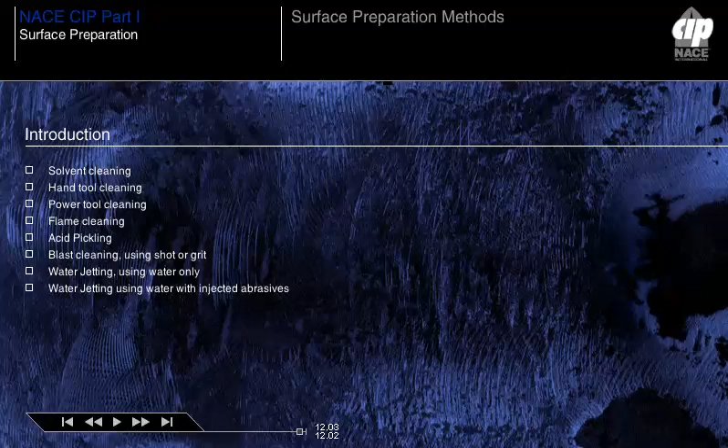New unpainted steel is relatively easy to clean. Provided that the surface has not been exposed to corrosion in a chemical or marine environment, the biggest problem is likely to be removal of mill-scale deposits. Blast cleaning using either shot or grit can easily remove most mill-scale.

An advantage of using grit for blasting is the simultaneous creation of an angular surface profile that is suitable for good adhesion of coatings. Tightly adhered mill-scale can be difficult to remove without blast cleaning.

New unpainted metals such as aluminium or zinc can be prepared by light blast cleaning to both clean and roughen the surface. Adequate adhesion of coatings to the prepared surface may be difficult to achieve any other way.

Chemical or solvent cleaning may be possible, but special paint primers, such as acid etch primers, must then be used to achieve good performance. Mill-scale is formed by reaction between the hot steel and oxygen in the environment during the production process. As a result, the surface of newly produced hot-rolled steel is generally covered with blue-black deposits of mill-scale.

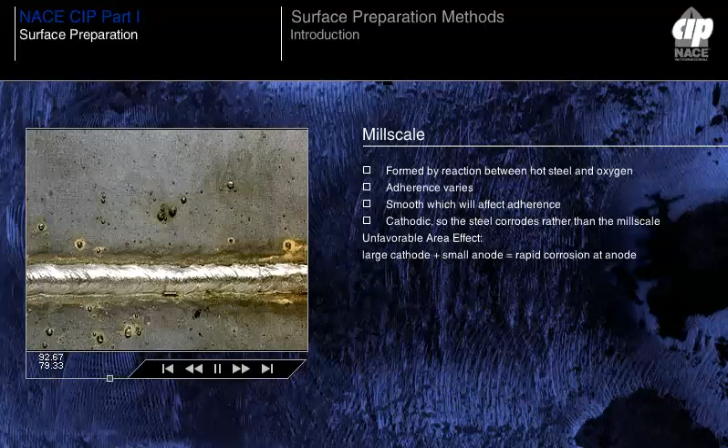When most of the surface is covered by mill-scale, corrosion at the anodic areas may be accelerated by the unfavorable area effect shown in the formula. For best results, new steel should be cleaned by abrasive blasting to remove mill-scale and to provide an anchor pattern for optimum coating adhesion.

Surfaces that have been exposed to the environment and have subsequently corroded may be more difficult to clean. The surface is often rough and may have deep pits and other irregularities. When chemical contaminants have become bonded to the surface through a chemical corrosion reaction, removal may require special treatment.

The processes used for cleaning corroded steel are generally the same as those used for cleaning new steel, and include hand and power tools, blast cleaning, and perhaps water jetting. Zinc exposed to the atmosphere develops a passive film of zinc oxide and/or zinc carbonate. Provided they are tightly adherent, these layers can aid the adhesion of paints due to their relative roughness.

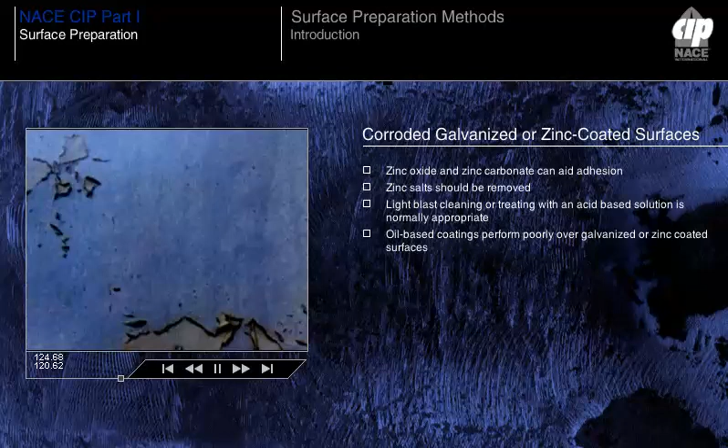This reaction, the formation of soap, causes degradation of the oil-based binder and consequent loss of adhesion of the coating to the zinc surface. Aluminium oxidizes in the atmosphere much like zinc and zinc-coated surfaces to form a passive film of aluminium oxide.

The surface should be lightly blasted or wire brushed to remove powdery or loosely adherent salts before treatment with an aluminium treatment, for example, etch primer before coating. A primer with known compatibility and strong adherence to the clean surface should be selected.

Other surfaces that are commonly painted include plastics, wood and concrete. All of these require special surface preparation and coating suited to their special characteristics. A discussion of surface preparation for these surfaces can be found in the Advanced Surface Preparation module.

The choice of surface preparation method is often determined by the choice of coating system. Coatings should be matched to the degree of surface preparation desired or possible. If coatings are to be successful with very little surface preparation, they must be chosen for their surface-tolerant characteristics.

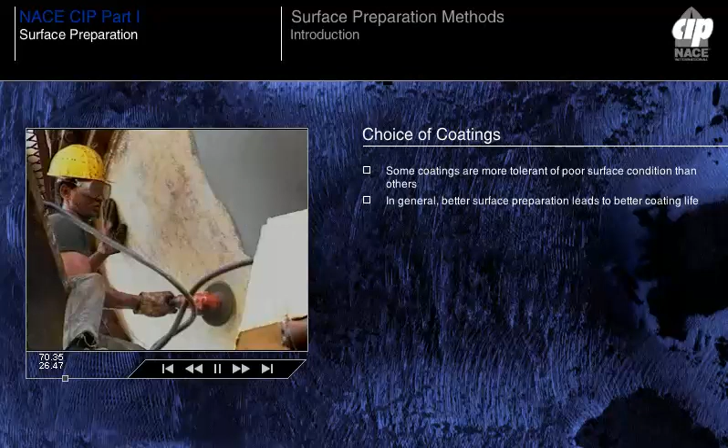Most coatings need better standards of surface preparation. Modern high-performance coatings are likely to require blast cleaning to a high degree of cleanliness, and in some cases may also require that the surface is free of chemical contamination.

The degree of cleaning required is closely related to the type of coatings to be used, although in general a better standard of cleaning will provide better long-term protection from any coating system.

Solvent cleaning is a method for removing all visible oil, grease, soil, drawing and cutting compounds, and other soluble contaminants from steel surfaces. It is intended that solvent cleaning be used prior to the application of paint and in conjunction with surface preparation methods specified for the removal of rust, mill scale or paint.

The standard SSPC SP1 is the only commonly used standard that formally governs solvent cleaning to remove oil, grease, dirt, soil, drawing compounds and other similar organic compounds. SSPC SP1 defines a variety of pre-cleaning methods, including those listed here.

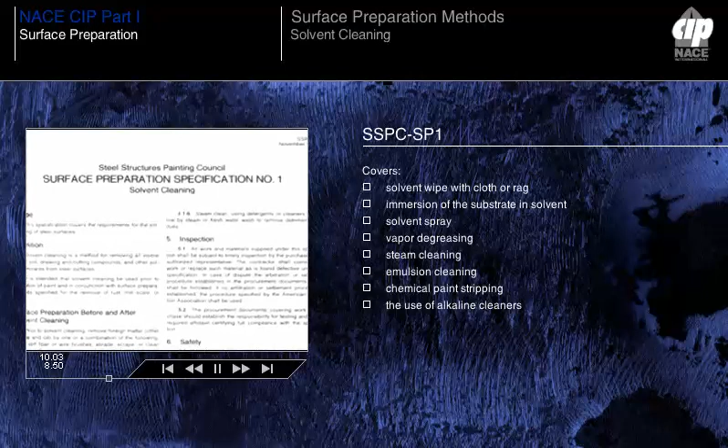Organic solvents such as kerosene, turpentine, naphtha, mineral spirits, toluol, xylol, etc. clean the metal by dissolving and diluting the oil and grease contamination on the surface. Some organic solvents used for solvent cleaning may be considered hazardous to health and are generally likely to be a fire risk. In particular, toluol is subject to health and safety restrictions in many countries.

Inorganic materials such as chlorides, sulfates, weld flux and mill scale are not removed by organic solvents. The last wash or rinse should be made using clean solvent to remove the slight film of oil or grease that may be left on the surface. This film, if left in place, may interfere with the adhesion of the coating to the surface.

Some solvents, for example xylol and toluol, will also dissolve some paint films so they can be removed from the surface. Non-convertible coatings, for example chlorinated rubber or vinyl, are most likely to be softened or removed by solvent washing.

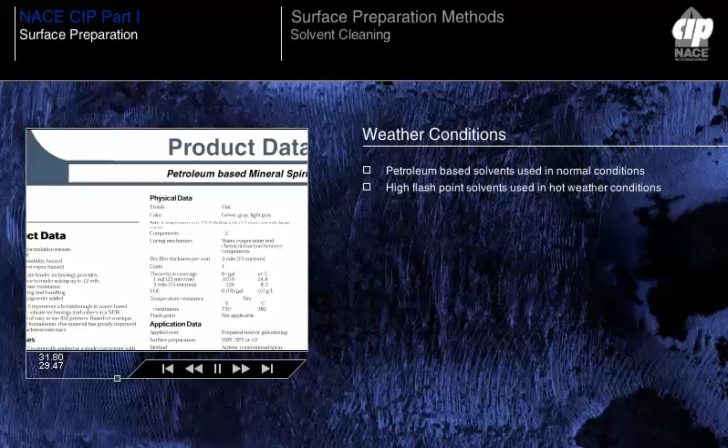All solvents are potentially hazardous and should be used when their concentrations in air being breathed by workers are low enough for safety, in accordance with current federal, state and local regulations for threshold limit values, TLV. Appropriate fresh air masks should be used in confined spaces and when the safe concentration may be exceeded. The fresh air supply should be free of carbon monoxide, CO, or other contaminants from other sources such as engine exhausts, etc.

The concentration of solvents in air should not exceed the lower limit of flammability, known as the lower explosive limit, LEL, or a fire or explosion could occur. Such concentrations are most likely to occur in confined spaces, such as tanks, pipes or vessels. In general, cost considerations and regulations restricting the use of organic solvents have become so stringent as to discourage the use of these materials except in highly controlled special situations.

Alkaline cleaners such as trisodium phosphate, TSP, and sodium hydroxide saponify certain oils and greases, and their surface active components wash away other contaminants such as oils. These cleaners may also saponify certain coating vehicles, and the soaps formed can be washed away easily with water.

Often, alkaline cleaners are combined with surfactants, wetting agents, inhibitors and detergents to form proprietary products and should be used according to the manufacturer's recommendations. These products are often used at elevated temperatures. In the cleaning process, a slightly soapy film may be left on the surface. This film must be washed off, usually with a high-pressure, hot water rinse. Residues that remain on the surface will affect the adhesion of the coating to the metal.

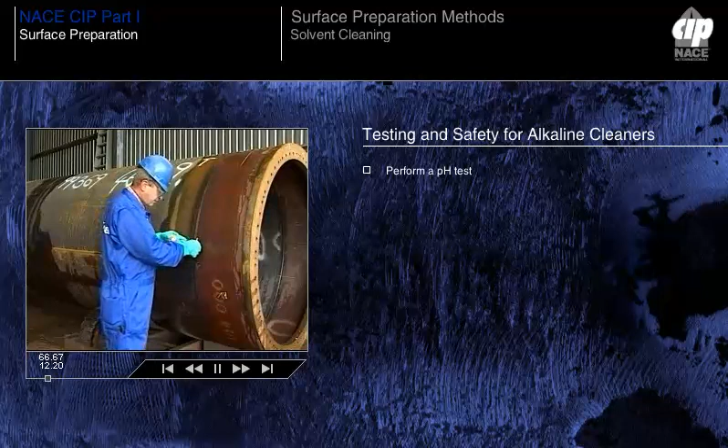A pH paper test could be made to determine the effectiveness of the wash. In general, the pH of the washed surface should not exceed the pH of the wash water. In some cases, the owner may elect to use an acidic wash, such as 0.1% by weight chromic acid, sodium dichromate, or potassium dichromate, to neutralize traces of the alkali on the surface.

Safety precautions should be followed in using the alkaline cleaners and chromic acid. The alkaline materials may cause burns, and the chromic acid and chromates may cause dermatitis. Workers should wear rubber gloves and safety goggles or eyeglasses, and where these materials may be applied by spraying, respirators should be used.

Acidic cleaners are usually composed of fairly strong acids, such as phosphoric acid, H3PO4, with small quantities of surfactants, water-miscible solvents, and organic wetting and emulsifying agents. Acidic cleaners remove soil by chemical attack and by dissolving the reaction products. They may be used to remove corrosion products and for other special purposes.

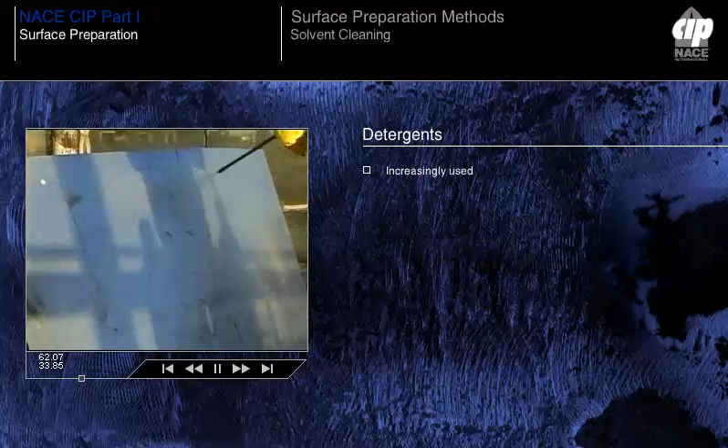Generally, these cleaners are composed of buffering salts, dispersants, soaps and inhibitors, and they function by wetting, emulsifying, dispersing and solubilizing the contaminants, which can be washed away using water, usually hot, or steam. They are frequently used at temperatures ranging from 150 degrees Fahrenheit to 212 degrees Fahrenheit, 65 degrees centigrade to 100 degrees centigrade.

Emulsion cleaners typically are proprietary products and should be used in accordance with the manufacturer's instructions. These cleaners may contain oil-soluble soaps or emulsifying agents, buffering salts, dispersants and inhibitors, along with kerosene or some type of mineral spirits. Emulsion cleaners are generally sprayed onto the surface to be cleaned, and they function by wetting, emulsifying, dispersing and solubilizing the contaminants.

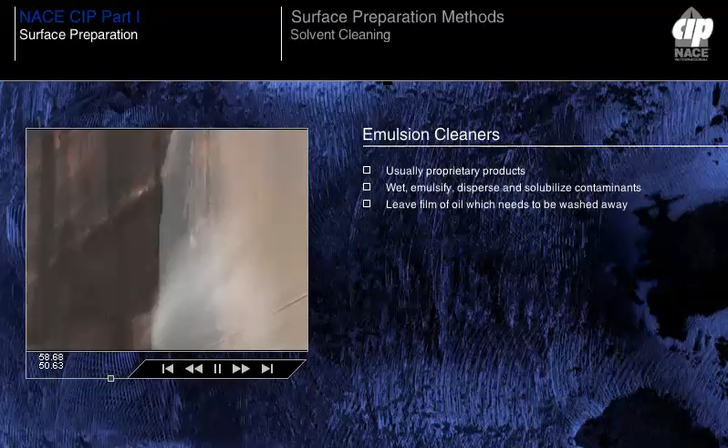Generally, the emulsion cleaners on the surface leave a thin film of oil which must be washed away with hot water, steam, solvents, detergents or some type of alkaline cleaning agents. Water is a common, if not powerful, solvent and may be used to good effect in cleaning a surface. We'll discuss its use later when we discuss water blast cleaning and water jetting.

In the use of any cleaning method, appropriate safety precautions must be taken. Also, it's important to thoroughly rinse surfaces, particularly when alkaline or acidic materials are used, to minimize the amount of soil remaining and to remove residues of cleaning materials that could adversely affect subsequent coating performance.

Hand tool cleaning is a method to prepare steel surfaces by the use of non-powered hand tools. Hand tool cleaning removes all loose mill scale, rust, paint, and other detrimental foreign matter. It's not generally intended that adherent mill scale, rust, and paint be removed by this process. Mill scale, rust, and paint are considered adherent if they cannot be removed by lifting with a dull putty knife.

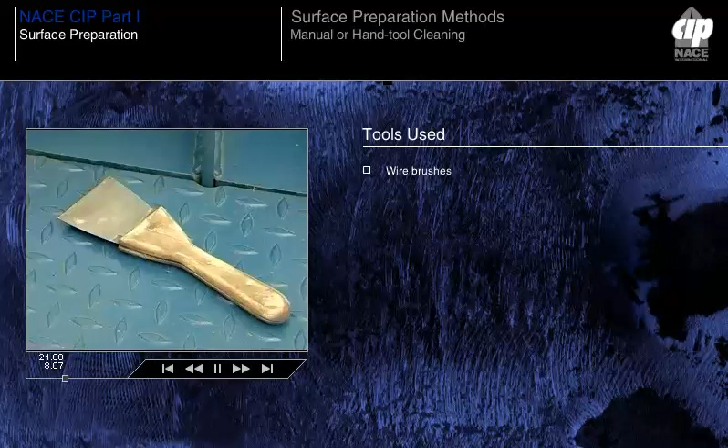Both standards define the use of a dull putty knife to determine whether contaminants are firmly adherent or not. Note, some inspectors have been known to use a sharpened putty knife, which violates the standard. Tools used in hand cleaning include wire brushes, scrapers, chisels, knives, and chipping hammers.

When hand tool cleaning operations commence, certain procedures are followed. The surface is inspected to determine its condition and the presence of heavy layers of rust, and to detect any foreign substances such as oil, grease, or dirt. Solvent emulsion cleaning may be specified or required to remove oil, grease, or dirt. Heavy layers of rust should be removed by chipping.

The surface is cleaned with any of the hand tools previously mentioned and then inspected prior to coating. The coating should be applied within the time period required by the specification. Manual cleaning is the slowest and perhaps the least satisfactory method of surface preparation. Normal tools used are wire brushes or scrapers or chipping hammers. The process is slow, labor-intensive and costly, with the end result still far from satisfactory. It is practically impossible to remove all rust and mill scale by this method.

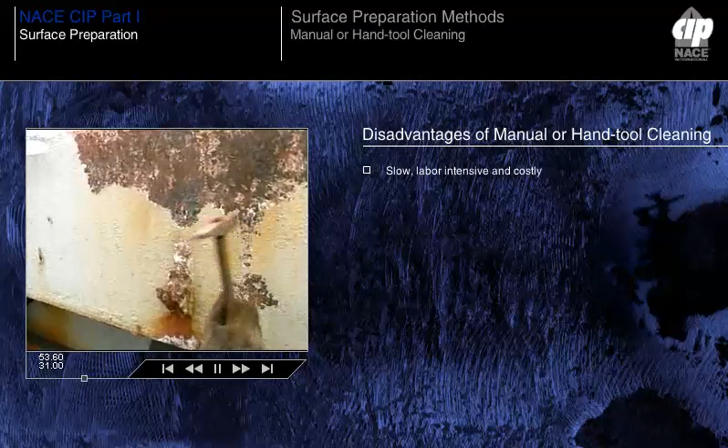A complicating factor can be the reluctance of labor to engage in arduous manual tasks. Slow progress and deteriorating labor relations can lead to significant increases in the cost of achieving a clean surface by these methods. Hand tools have the advantage of being portable and not requiring support power supplies. They're most suitable for use when small areas of work are to be prepared in the vicinity of other workers, or when access is difficult, such as when maintenance is performed on communication towers, 100 meters in the air.

Manual cleaning should only be used when weather or some other factor precludes the use of another, more efficient process. Hand cleaning is one of the oldest methods of surface preparation. Generally, it's used only when power-operated equipment is unavailable, where the work is inaccessible to power tools, or where the job is too small to warrant use of power tools.

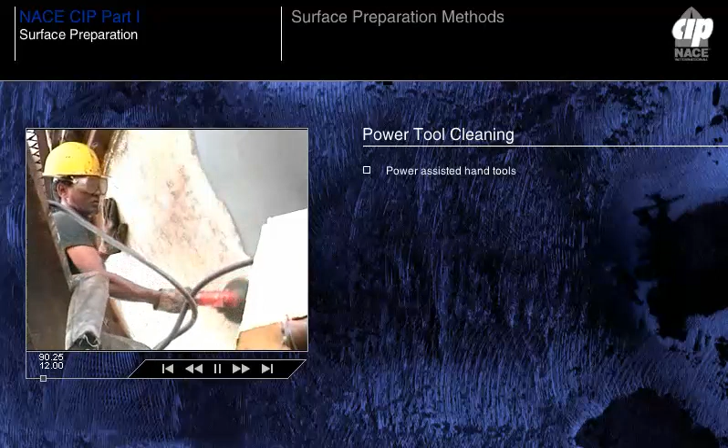Power tool cleaning is a method of preparing steel surfaces by the use of power-assisted mechanical cleaning tools. These tools are essentially similar to the tools used for hand tool cleaning, but a power source such as electricity or compressed air is used.

This process can remove all loose mill scale, loose rust, loose paint, and other detrimental foreign matter, but is not intended to remove adherent mill scale, rust and paint. As in SSPC SP2, mill scale, rust and paint are considered adherent if they cannot be removed by lifting with a dull putty knife. The standards most commonly used to govern the power tool cleaning process are SSPC SP3 or ISO 8501-1 ST3.

Power tool cleaning is frequently used in maintenance operations. In addition to removing loose mill scale, rust and paint, this method is used to remove weld flux, weld spatter and laminations, and to smooth rough welds, and round out gouges before abrasive blast cleaning.

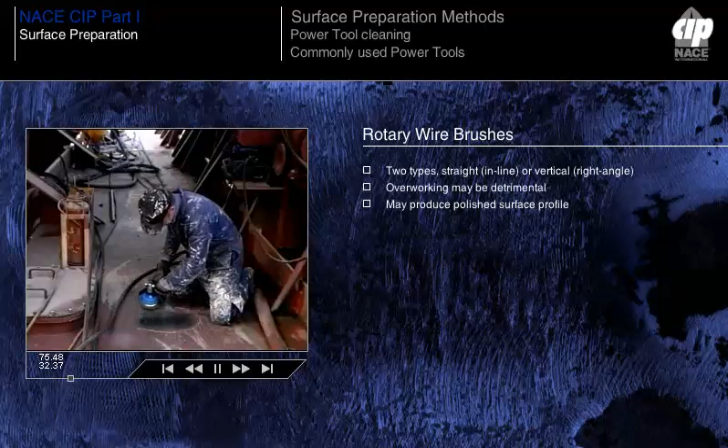The machine design is of two general types: straight or inline, or vertical or right angle. Shown here is a right angle wire brush. Overworking the surface with a wire brush may be detrimental because excessive burnishing develops a polished surface which provides a poor anchor for most coatings. Rotary power wire brushes can also easily spread oil and grease over the surface. Therefore, solvent cleaning is an essential step before power wire brushing.

Problems with polishing the surface rather than providing a roughened surface are particularly likely with this technique, and mean that the use of rotary wire brushes is considered to be less desirable than other forms of power tool cleaning.

A chipping or scaling hammer is the most widely used type of impact tool. A chisel is inserted into the power tool, and the impact from an air-operated or electrically operated piston is transmitted to the chisel, and in turn to the surface to be cleaned. Chisels may be of different shapes and materials. They should be kept sharp, otherwise they may drive rust and scale into the surface. Scrapers and special chisels can be suitably mounted into pneumatically or electrically powered impact tools.

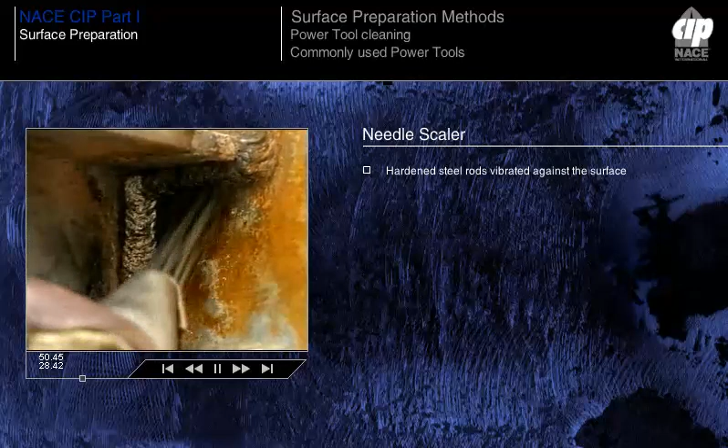A needle gun or needle scaler consists of a number of hardened steel rods which are vibrated against the surface. It is slow in operation and suffers from the same problem as other power tools, since it has a burnishing effect when producing a relatively clean surface. It does, however, produce a surface profile. The needle scaler is effective on welds, corners and irregular surfaces. Certain types of needle scalers fitted with vacuum devices are being used to remove lead-based paint to comply with federal regulations regarding lead abatement.

Piston scalers operate similar to scaling hammers, but the piston also acts as an impact tool. A hammer piston, which takes the place of the chisel, is a circular shaft with the cutting end cross-shaped, somewhat like a star chisel. These scalers are available with 1, 2 or 3 pistons operated in one tool. Also, large assemblies with as many as 15 pistons are available for use on flat, horizontal surfaces such as steel decks. A wide variety of chisels are available for different types of work.

These tools can be used advantageously on large areas to remove rust and scale. Care must be exercised to prevent the cutters of these large rotary scalers from cutting the metal to such an extent that metallic points extend far above the surface, causing early paint failure due to insufficient paint coverage. If these tools are used to remove mill scale and rust from the surface, it's very likely that the surface will be very rough, and care must be taken to ensure that all peaks of the anchor pattern are covered by the coating applied.

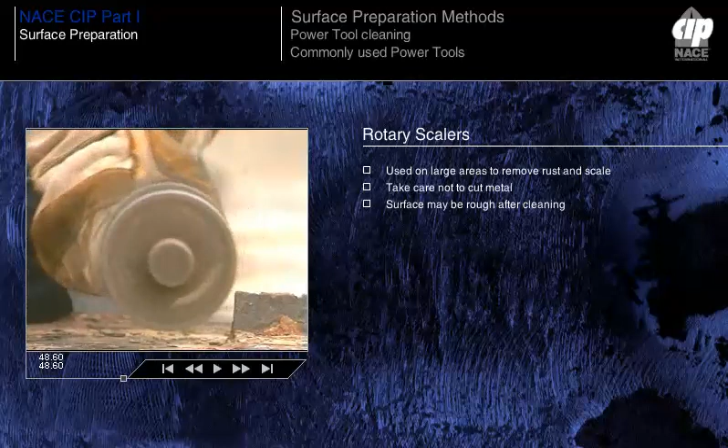Grinders and sanders are often employed to prepare surfaces for painting. Machines used for this purpose may be the same as those used for power wire brushing, with suitable sanding discs or grinding wheels substituted for the wire brushes. The abrasive grit size used with this type of cleaning equipment must be selected properly. Too coarse an abrasive will create a deep anchor that may be unsuitable for good paint performance. An abrasive that is too fine may cause early clogging of the grinding wheel or sanding disc, thus making the process inefficient.

Grinding is well suited for removing weld spatter, for smoothing weld seams, or for rounding off sharp edges or corners. Grinders are frequently used in repairing minor fabrication defects. The anchor profile produced can be extremely good, with complete removal of rust and mill scale. However, such methods of cleaning are very expensive for large areas.

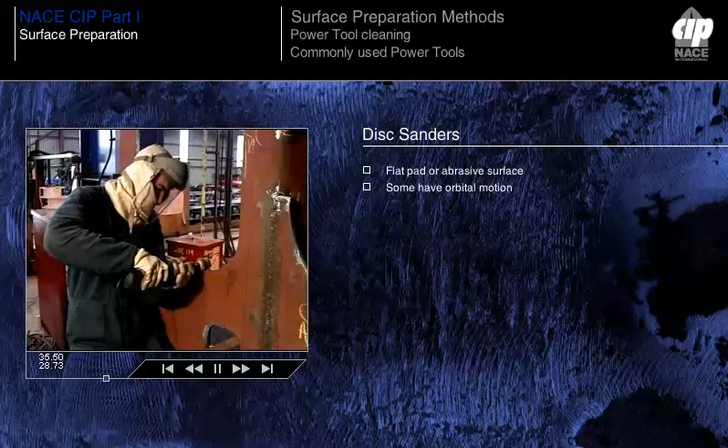Also available are pneumatic and electrically operated sanders that have a flat pad or abrasive surface in contact with the metal to be cleaned. Some of these motor-driven sanders have an orbital motion. Flexible shafts are used on a small scale to operate rotary wire brushes and grinding wheels. On other grinding equipment, the discs or wheels are mounted directly to the main shaft of the motor of other portable or stationary units.

In 1987, SSPC adopted a new standard, SP11, titled Power Tool Cleaning to Bare Metal. When the highest levels of surface preparation are required or specified, for example, SSPC SP11, production of a surface profile is a mandatory part of the surface preparation operation. A surface profile can also be achieved using special power tools designed for the purpose.

SSPC SP11 calls for power tool cleaning to produce a bare metal surface and to retain or produce a profile, where a clean, roughened bare metal surface is desired, but where abrasive blast cleaning is not feasible or is not allowed.

Metallic surfaces prepared according to SSPC SP11, when viewed without magnification, shall be free of all visible oil, grease, dirt, dust, mill scale, rust, paint, oxide, corrosion products, and other foreign matter. Slight residues of rust and paint may be left in the lower portion of pits if the original surface is pitted. If painting is specified, the surface must be roughened to a degree suitable for the paint system, with a profile not less than 1 mil, 25 microns.

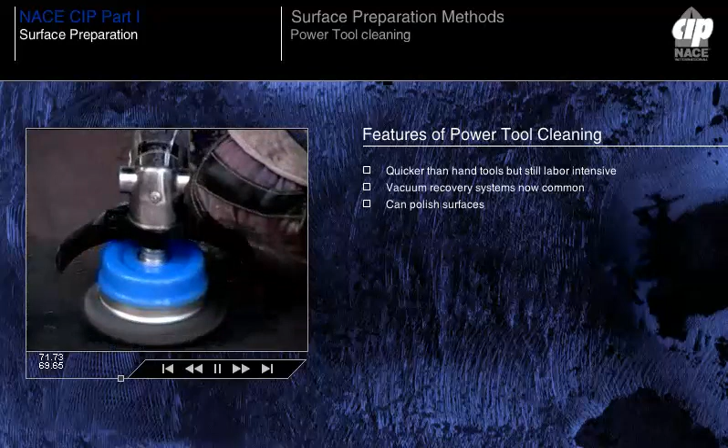The most generally established method of surface preparation for the application of coatings is by dry grit blasting, as defined below. Indeed, when modern sophisticated coatings are applied for surface protection, there is no truly satisfactory or economically equivalent alternative process. The fundamental principle of the grit blasting process is the removal of rust, mill scale, or other surface contaminant, and obtaining a suitably roughened surface by projecting a highly concentrated stream of relatively small abrasive particles at high velocity against the surface to be cleaned.

The surface is abraded through the high-velocity impact of abrasive particles. In preparing steel surfaces for painting by blast cleaning, rust, mill scale and old paint are removed along with some of the base metal.

Various degrees or standards of surface cleanliness achieved by abrasive blast have been defined. The abrasive blast cleaning standards for new steel most commonly used in abrasive blast cleaning applications are produced by NACE, SSPC or ISO. In October 1994, NACE and SSPC issued the following joint surface preparation standards for abrasive blast cleaning. NACE No. 1, SSPC SP5, white metal blast cleaning. NACE No. 2, SSPC SP10, near white metal blast cleaning. NACE No. 3, SSPC SP6, commercial blast cleaning. NACE No. 4, SSPC SP7, brush-off blast cleaning.

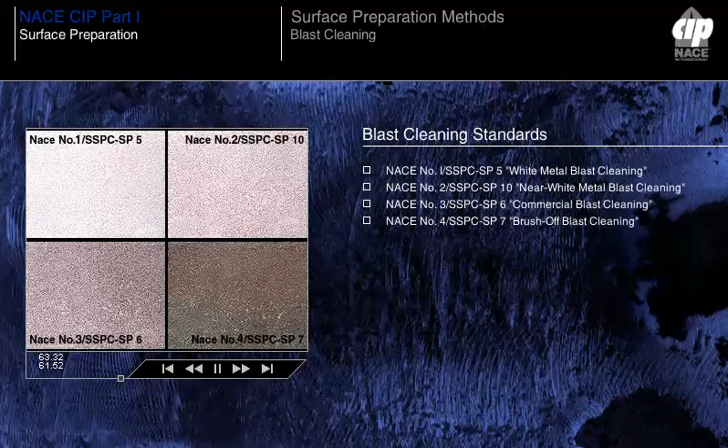These standards are roughly equivalent to the ISO standards that were developed from the original Swedish standards. ISO 8501-1 was published in 1988 and contains 4 standards. Sa 3, blasting to visually clean metal. Sa 2.5, very thorough blast cleaning. Sa 2, thorough blast cleaning. Sa 1, light blast cleaning.

Each system of standards represents a progressive scale of visual appearance only, the best grade being shown first in each case. The quality of blast cleaning is determined visually, and photographic standards are generally used for comparison purposes. There is no correlation between the degree of blast cleaning used and the surface profile produced, and no specific correlation with removal of chemical contamination or non-visible salts. For these issues, other standards and measuring techniques must be used.

Particles of abrasive may be projected by direct feed of the particles from a pressurized container into a high-pressure airstream, pressure blasting, or by centrifugal projection from rapidly rotating impellers, centrifugal blasting or airless blasting.

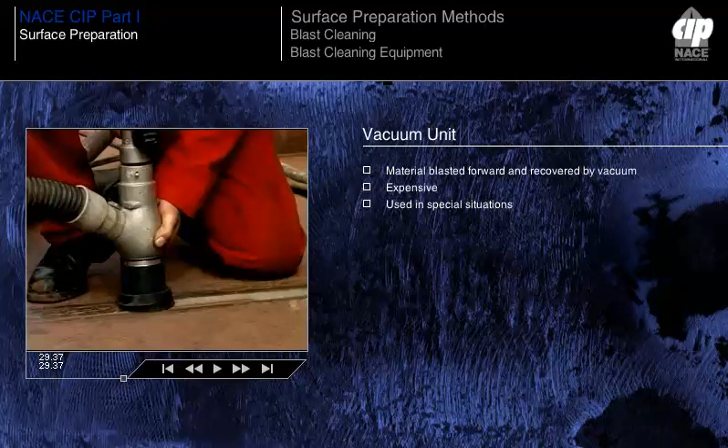Air moves sand from hopper to nozzle. No pressure is applied to the blast hopper. Energy to move the abrasive out of the hopper comes from a reduction of air pressure through a venturi. Because abrasive moves forward at a lower velocity, this method is used for light-duty jobs, such as frosting glass, blasting welds, and blasting car bodies and touch-up work.

Abrasive is blown into a standpipe and out through an elbow into the hose. This method is commonly used with fine abrasives.

A suitable type of blast unit must be chosen for the specific job. The most commonly used manual blast units are pressure vessels and are able to deliver abrasive into a compressed air stream by pressurizing the abrasive container. Other designs, such as gravity-fed pots or suction-fed units, are not commonly used for surface preparation on an industrial scale.

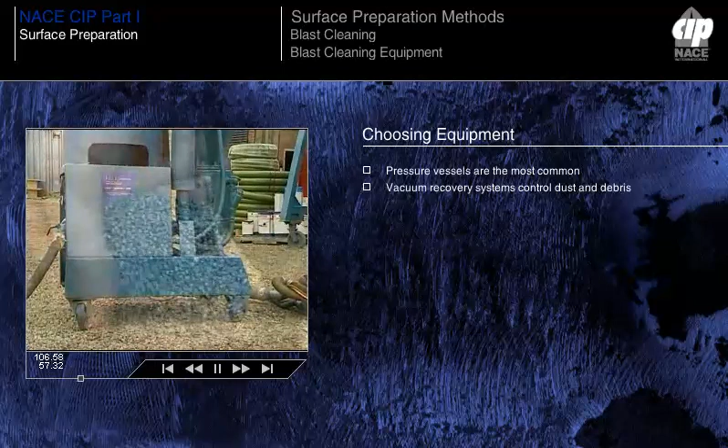When control of dust and debris is important, vacuum recovery systems are fitted to existing equipment, or specially designed units are used. The abrasive and waste are collected together, then generally separated and the abrasive recycled. The abrasive used in this case must be suitable for recycling.

The size of blast unit usually varies with the job. Blast units can range in size from those holding 1.5 bags of abrasive for a small job to those holding over 40 tons of abrasive.

It is important to document the quantity, type and size of equipment on the job. If the specification addresses certain equipment requirements and the equipment does not meet these requirements, the inspector should report the deficiency to the owner's representative.

It is sometimes desirable to blast clean individual items in an enclosed space so that other trades can continue to work in the immediate vicinity. If this is a regular requirement, many factories will buy or build a blast cleaning cabinet. The size of typical cabinets may vary from the very small cupboard, where blasting is done from outside the cabinet, with hands inserted through holes in the side, to the relatively large blasting room.

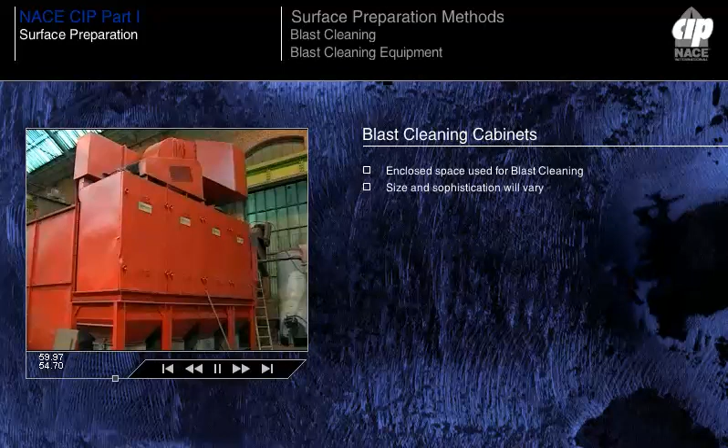The most complex of the blast cleaning cabinets are designed for large quantities of steel to be blast cleaned on a regular basis, such as all plate received by a shipbuilding yard. These machines, often known as wheelabrators, are designed to work on a continuous basis and include a conveying system that will carry items through the cabinet continuously.

It is usual for these cabinets to use a system of rotating wheels with vanes to propel the abrasive, from which the term wheelabrator has been adapted for general use. These cabinets too have an abrasive recovery and recycling system and are capable of very high rates of cleaning.

Blasting with a wheelabrator machine is often highly automated and is best suited to repetitive blasting tasks at a fixed location. Typical locations would include shipyards or steel structure fabrication facilities, such as those used for building oil production platforms and their ancillary equipment.

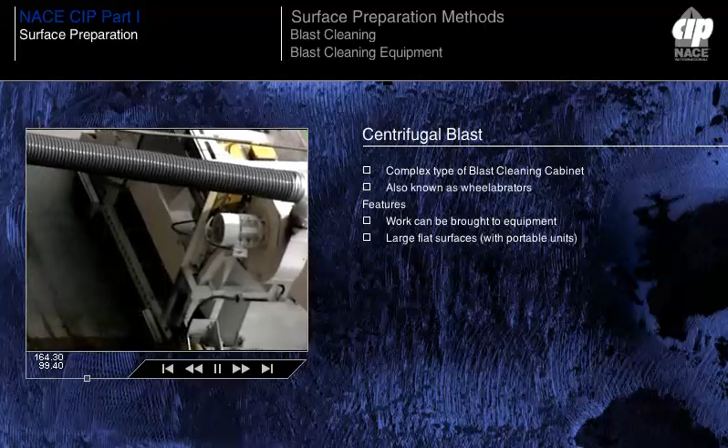This method of cleaning is used in a stationary setup when work can be brought to the equipment, for large flat surfaces when a portable wheel blast unit can be driven across the surface, such as on the flight deck of an aircraft carrier, or on concrete surfaces such as floors, pits, etc. To eliminate the need for compressor setup, including air blast hoses, abrasive pot and an attendant, and for lower production cost.

Centrifugal blasting may be used on such workpieces as pipe, piling, reinforcing steel, beams, flat plate, etc., with a series of centrifugal blast wheels housed in a blast enclosure, arranged so all sides of the work are cleaned as it travels through the equipment. Wheel blast operations are described in more detail in the advanced module of this training program.

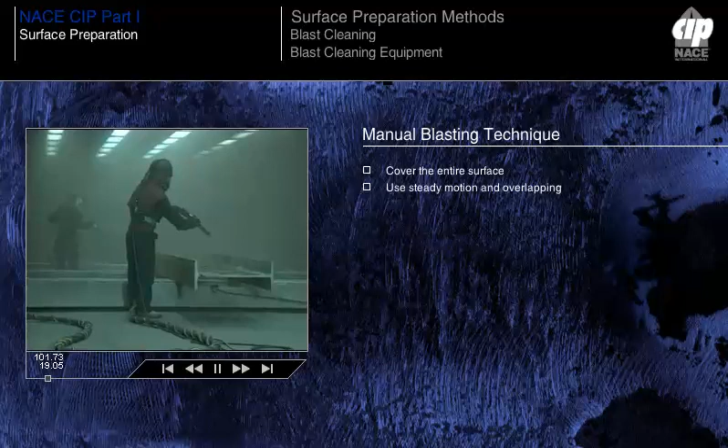Manual blasting should systematically cover the entire surface to be cleaned by moving the nozzle at fairly constant speeds in straight paths, each succeeding pass overlapping the preceding one and exposing clean metal without any discolored patches. The standard of blast cleaning should be no more and certainly no less than is required by the specification.

The nozzle should be held close to right angles to the surface, but at a slight angle so that the abrasive does not bounce right back at the operator. Some surfaces, such as those with heavy mill-scale layers, or with coatings such as thermal sprayed zinc or aluminium, are best blasted initially at a shallower angle, for example 45 degrees.

The operator must be aware that this technique, while efficiently removing the existing coating layer, produces a reduced surface profile due to the angle of impact. Final blasting at right angles to the surface is required if the correct surface profile is to be achieved. Speed of nozzle traverse is dictated by rate of cleaning and should be as fast as will clean thoroughly without unnecessary dwell.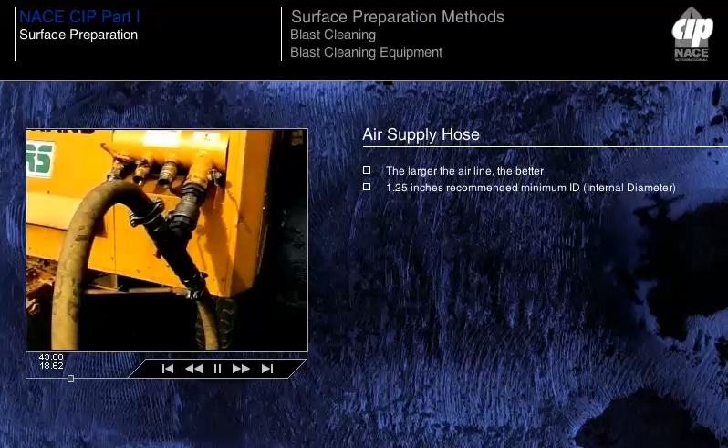The recommended size should be 3 to 4 times the nozzle orifice. On lines longer than 100 feet, 30 meters, the hose internal diameter should be 4 times the blast nozzle orifice size. The large size eliminates loss of air pressure through the air hose because of friction.

There are two types of abrasive supply hose. 4-ply, for use when the hose is subject to external abuse or when there is danger of the operator pulling it at right angles. 2-ply, a lighter hose that is preferred by some blasters because of its greater flexibility.

All hoses should have capped ends to allow for coupling and to prevent any moisture or compressed air from working its way through the braid or ply of the hose. Air inside the hose can cause the hose cover to bubble. Water can cause rotting away of the wrapping on the hose. The size and length of abrasive blast hoses are related to their efficiency.

Hoses generally cannot be too large. 75% of hoses used today have a 1.25 to 1.5 inch inside diameter, 31 millimeters to 38 millimeters. A rule of thumb is that the hose ID should be 3 to 4 times the size of the nozzle orifice.

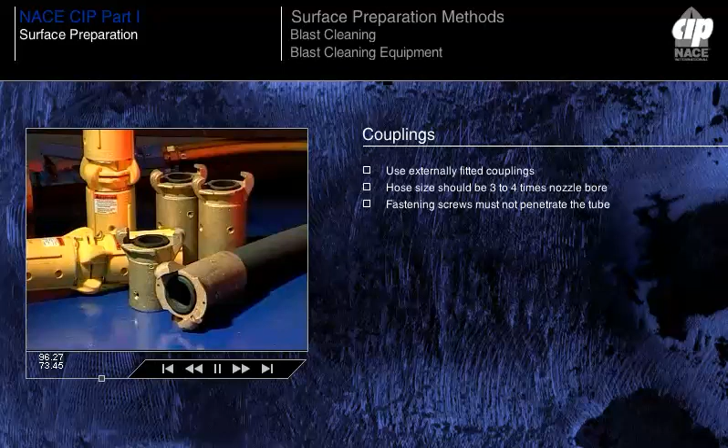Couplings are made of both bronze, which lasts longer, and plastic, which is lighter and easier to handle when the hose must be lifted into the air. Couplings should be wired shut or otherwise properly coupled, both to ensure safe connections and to prevent the coupling from opening if caught on irregular surfaces. Grounding should be maintained through the coupling.

Owing to the inevitable pressure drop within airlines, pressure hoses should be kept as short as possible. When greater distances must be used, the hose should be kept in straight runs, and any bends should be wide and have a smooth radius.

Efficient use of the blast pot can save money in both man-hours and abrasives. The blast pot should be emptied daily if practical and kept dry to avoid contamination of the abrasive. Maintenance should be performed to eliminate leaks and eliminate pressure losses. The vessel should be inspected annually and hydro-tested to 1.5 times the design pressure to ensure effective functioning.

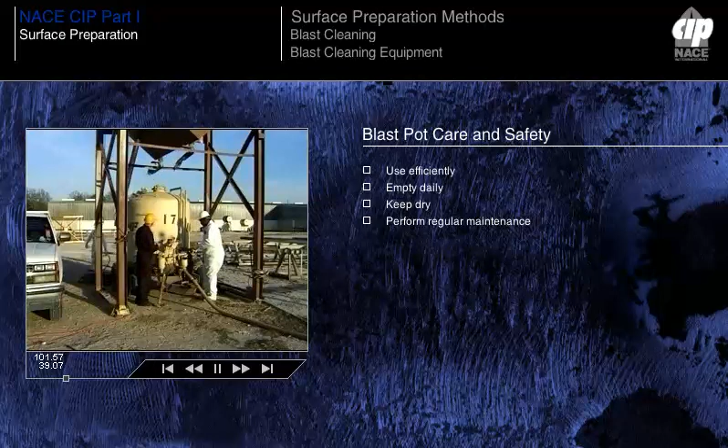Blast cleaning is a potentially hazardous operation. Safety with abrasives under pressure is very important. Remember that abrasives and air leave the nozzle at great speed, at a rate close to 450 miles per hour, 720 kilometers per hour, 660 feet per second, or about half the speed of a shotgun charge, and can impact on surfaces or other workers a considerable distance from the operation.

The entire system, including hoses, operator and workpiece, must be grounded to prevent injury due to electrical shock. Grounding is particularly important when the operator is working at heights, when shock may lead to a fall, or when blasting in a hazardous environment.

In the blast cleaning operation, the air compressor must be capable of delivering sufficient air volume to maintain the required pressure at the nozzle. Related equipment, including the following, must be of sufficient size and type to match the compressor output: air and abrasive hoses, hose couplings, blast nozzles.

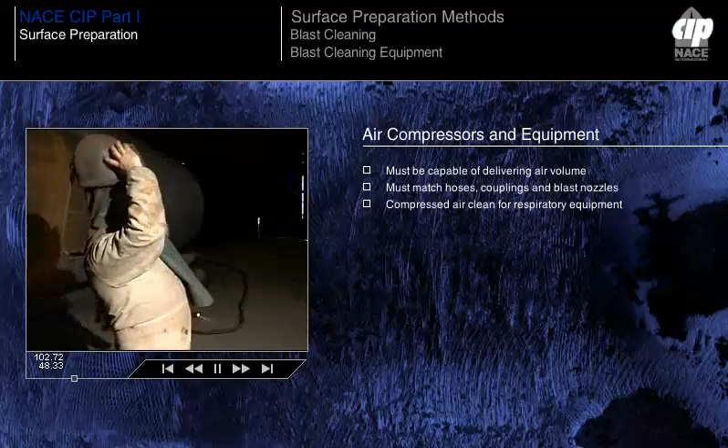The compressed air must be free of contaminants, including oil and water. First, since air-supplied breathing equipment is required when abrasive blast operations are being performed, it is critical that the breathing air be fresh and pure. This is the responsibility of the applicator. Second, it is important that the blast air be clean to ensure that the blast cleaning operation does not add contaminants to the surface being cleaned.

The blasting contractor is responsible for complying with all requirements of the specifications, such as size of hose, type of nozzle and air volume, when these are detailed in the specifications. The coating inspector may check the requirements to ensure compliance by the contractor.

Compressed air is a common source of power for blasting machinery, paint spray equipment, power tools, etc. It is favoured on site because it is relatively safe, being less dangerous than electrical power. In order to produce quantities of compressed air, it is necessary to use a compressor. Normally driven by a diesel motor, though electric compressors are common in fixed workshops, a compressor draws in atmospheric air, pressurizes it, and feeds the air into a pressure vessel known as a receiver. The air is then held in the receiver until demanded by the equipment in use.

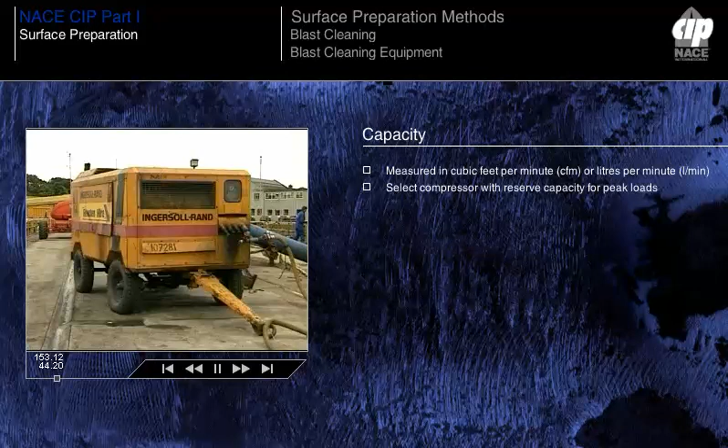For blast cleaning, using a 7/16 inch diameter nozzle operating from one blast pot, it is generally recommended that a compressor with a minimum capacity of 350 cubic feet per minute or 9,900 litres per minute is used. For extended use, a compressor with greater capacity, perhaps 600 cubic feet per minute, 17,000 litres per minute, will operate with less strain and greater efficiency.

The same compressor used for blasting is often used to drive air-operated spray guns and other equipment. No other equipment requires such large quantities of compressed air as the blast cleaning operation.

It is estimated that with one 3/8 inch, 9.5 millimeter nozzle operating, there will be a 5 pound, 35 kPa drop in pressure for each 50 feet, 15 meters of hose in use. This pressure drop will be compounded according to the number of operating nozzles, the nozzle sizes, and the lengths of hose being used.

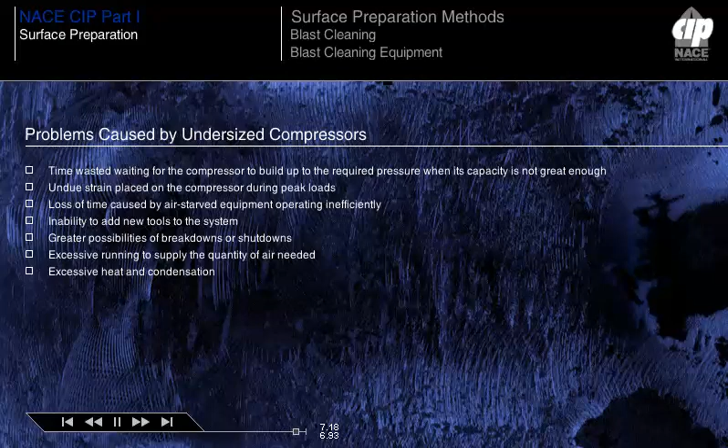A number of accessories are key parts of the compressor equipment. It is essential that surface cleanliness should not be impaired during the blast cleaning process. This can arise from oil vapor or droplets carried over in the air from the compressor, or from moisture entrapped in the high-pressure air, or from residual dust arising during blast cleaning.

Precautions should be taken to ensure that compressed air supplies are oil and moisture free. The installation of suitable oil and moisture traps, together with aftercoolers and filters in the airlines, is required, and these must be given adequate maintenance. Most oil and moisture traps are operated with drain plugs in a part open position, allowing accumulated moisture to disperse. Moist air can also cause abrasive to clog in the abrasive lines or blast pot, and may cause rusting of the blast cleaned surface.

Filter units contain charcoal and supply purified air to the blast hood. They also are equipped with a monitor to detect the presence of CO, carbon monoxide. The dryer units remove water from the compressed air to prevent the abrasive from becoming wet. Absorbent filters absorb moisture in compressed air to prevent condensation on the workpiece.

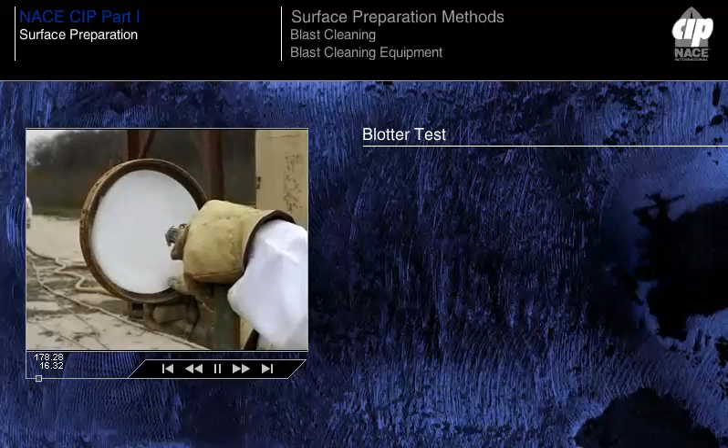Compressed air for the blast cleaning operation can be checked for the presence of oil or water by a simple test, which involves the use of white absorbent paper held in the air stream discharging from the compressor. The ASTM D4285 standard test method for indicating oil or water in compressed air requires the use of an absorbent collector, such as white absorbent paper or cloth, on a rigid backing, or alternatively, a non-absorbent collector such as quarter-inch transparent plastic.

The collector is centered in the discharging airstream within 24 inches of the discharge point for a period of 1 minute. The test should be conducted on the discharging air as close to the use point as possible and after the inline oil and water separators. The blotter test is used to check visually for any trace of oil or water in compressed air to be used in abrasive blasting or spray application of coatings.

In performing this test, the tester should allow the compressed air system to reach operating conditions, allow air to discharge at operating conditions to remove accumulated condensation in the system, fasten the collector material to a rigid backing, avoiding personal contact with the air stream.

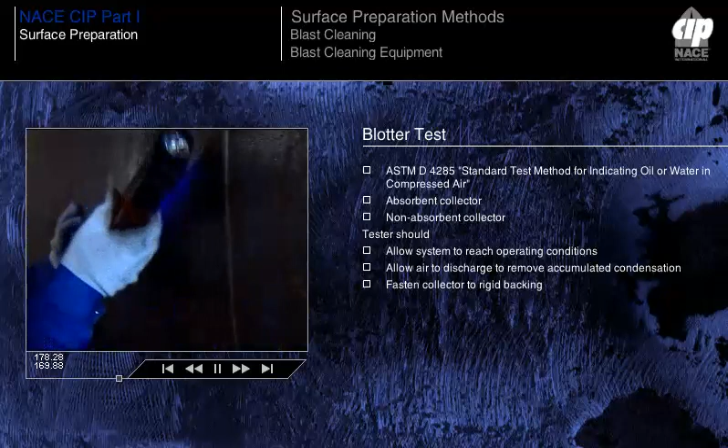Hydrocarbon oils usually can be distinguished from water using an ultraviolet light, or by detecting the characteristic odor of oil. The surface being cleaned should also be thoroughly inspected for any sign of oil or water.

Maintenance of nozzle size is of considerable importance and can be a problem if normal cast iron nozzles are employed, as these wear oversize quite rapidly. More efficient blasting can be obtained by the use of nozzles produced in special wear-resisting alloys or in such materials as tungsten carbide or ceramics. Although of higher initial cost, these nozzles are more economical in practice.

The internal profile of the blast nozzle is also an important factor. Venturi nozzles are generally preferred to the parallel bore nozzles formerly used, as they last longer, give higher grit velocity at more economic air consumption, and result in an overall increase in blasting efficiency.

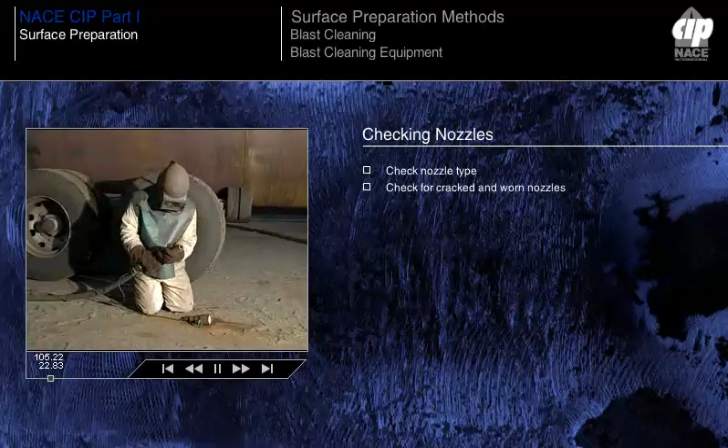Periodically, the user should check nozzle type. The Venturi type provides a higher abrasive velocity than a straight barrel type of the same size. Check for cracked and worn nozzles. A cracked nozzle should not be used because it can create a severe safety hazard. A worn nozzle decreases the effectiveness of the blasting operation.

A nozzle orifice gauge is used to measure wear. Some users specify that wear of the nozzle should not exceed one nozzle number, in the United States, 1/16 of an inch, 1.6 millimeters. Other users may require that a nozzle be replaced when wear reaches 50% of the original size. The nozzle aperture test is described below.

A test for nozzle pressure of the optimum 90 psi to 100 psi, 6.2 to 6.9 bar, should be made using the hypodermic needle pressure gauge during the blasting operation. With the blaster's agreement, the inspector or operator should measure the pressure by inserting the needle into the hose as close as possible behind the blast nozzle when the hose is in actual use, blasting with abrasive.

Materials for nozzle lining must be tough and durable and resist the abrasion which inevitably occurs. Nozzles lined with tungsten carbide have a 300-hour life. However, life expectancy is shortened when this nozzle is used with aluminium oxide or silicon abrasives. A silicon carbide nozzle weighs 42% less than a tungsten carbide nozzle, making it easier to hold for a long time. With a dependable abrasive, the silicon carbide nozzle lasts up to 500 hours, which is 50% to 60% longer than tungsten carbide.

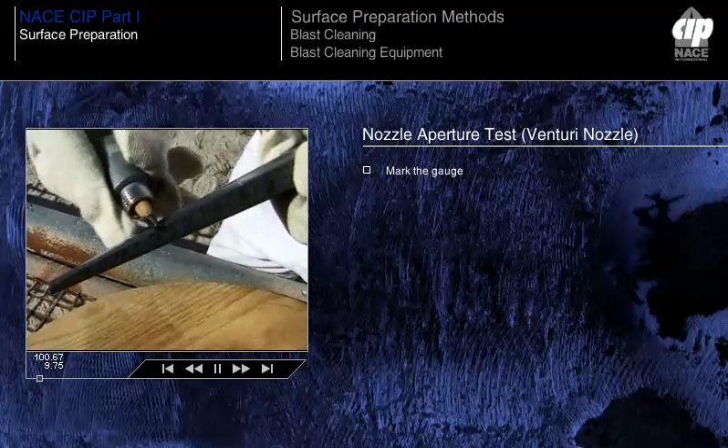Nozzle aperture should be checked regularly by means of a nozzle gauge. In performing this test, first, a mark is made on the gauge using a grease pencil at the approximate size of the nozzle. Next, the gauge is inserted in the back of the nozzle and twisted one full turn, 360 degrees. Then, the gauge is withdrawn and the black mark examined. The ID of the nozzle is indicated by where the grease pencil is rubbed off.

At the orifice size measured, the gauge indicates the volume of air in cubic feet per minute, or cubic meters per minute, necessary to deliver 100 psi, 6.9 bar at the nozzle. For example, a single number 6 nozzle, 3/8 of an inch ID, 9.5 millimeters, would require a compressor supplying 196 CFM, 5.5 cubic meters per minute, to deliver and maintain 100 psi.

If a larger diameter nozzle is used, or if the nozzle has worn to a half-inch ID, 12.5 millimeters, it would require a larger compressor supplying 335 CFM, 9.46 cubic meters per minute, to maintain 100 psi.

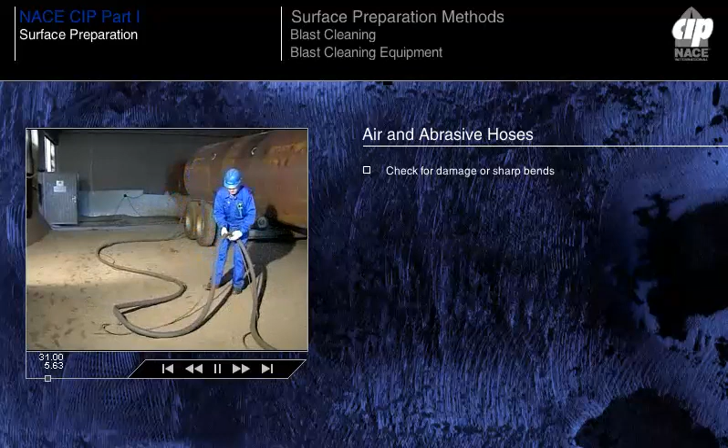The inspector should check for evidence of damage or sharp bends in the lines. Heavy objects should never be allowed to rest on a hose. Ensure couplings are wired together or securely coupled for safe operations, and ensure abrasive hoses are properly grounded.

The condition of the material to be blasted significantly influences both the rate at which blasting can be done and the quality of blast finish obtained. Heavy rusted or corrosion-pitted steel is difficult to clean thoroughly because of the extra blasting time and attention necessary to remove deep-seated scale and injurious corrosion products. Somewhat heavier grades of grit and high blasting pressures are advantageous for such surfaces.

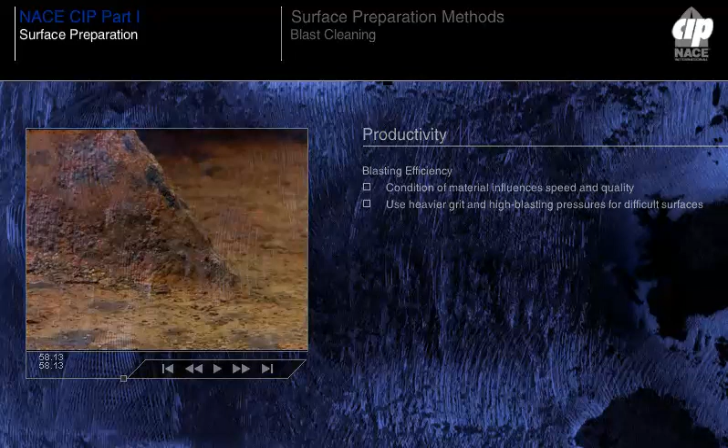Certain heat-treated alloy steels also acquire a particularly tenacious oxide scale, again requiring heavier grit and high blasting pressures for most efficient cleaning. In general, air pressure for grit blasting depends on such factors as grit quality and grade, type of material being blasted, and overall production requirements.

Expendable abrasives are better used at high pressures, above 90 psi, 6.2 bar, to obtain maximum cleaning rates, as grit breakdown after impact is of little consequence other than creating something of a dust problem. Increased pressure materially increases rates of blast cleaning due to greater grit throughputs and higher particle velocities.

Labor costs per area blasted can therefore be considerably reduced, although grit losses tend to increase significantly above about 70 to 75 psi. Also, at high blasting pressures, above 90 psi, operator fatigue can limit productivity on long blasting shifts. Nevertheless, it is usually recommended that blast pressure as measured at the nozzle be kept as high as possible, with the provision that it cannot normally exceed 100 psi for safety regulations.

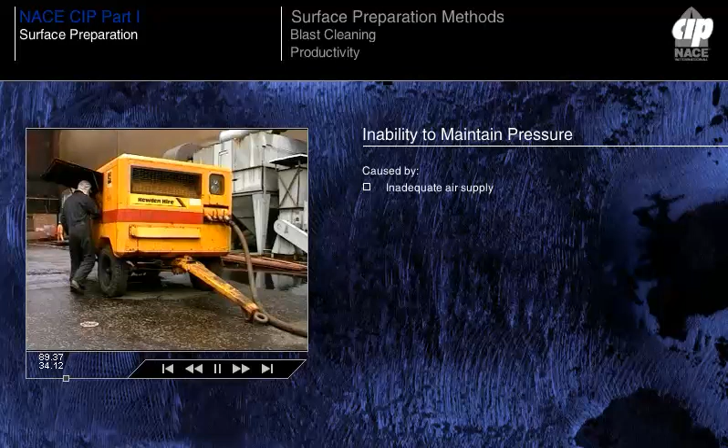Theoretically, a number 6, 3/8 inch nozzle, one of the popular sizes, requires 196 CFM. To provide the necessary quantity of air, a compressor of at least 300 CFM would normally be employed. For a larger nozzle, more air would be required, and a proportionately bigger compressor would be needed. Too small air hoses: friction losses are expensive.

Internal blast hose couplings can cause loss of efficiency, up to 15% of the working pressure. External couplings and nozzle holders are a must. Badly designed machines may have a significant pressure loss through the machine. Too small piping on the machine again causes friction losses. And compressed air lines should be kept straight and as short as possible.

Other important factors affecting blasting performance are correct choice of nozzles. Venturi nozzles are much more efficient than straight bore nozzles. Air must be clean and dry. Rates of cleaning cannot be quoted definitely. There are many variables affecting a blasting operation, including those shown here.

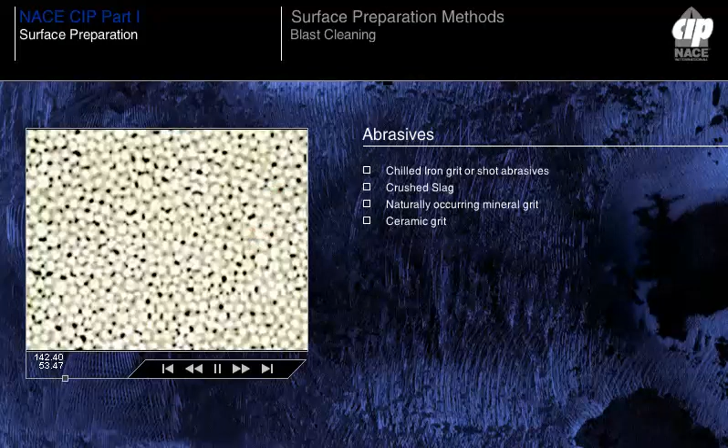These are chilled iron grit or shot abrasives, crushed slag, naturally occurring mineral grit, and ceramic grit. Despite the widespread use of the term sand blasting, sand is not listed as a grit blasting abrasive. Sharp sand is a cheap and effective abrasive, but increasingly cannot be used throughout the world due to the very real health hazard of silicosis.

Some naturally occurring forms of sand are said to be silica-free, and these may still be found in common use, particularly in the USA. Silica-free sand does not release silica in a harmful form, i.e. free silica, when it breaks up under the impact of the blasting process.

Permission to use sand may occasionally be given for site work in the open air, but only when the operators and other personnel are carefully protected from the dust created, and the site and blasting conditions are approved by the health authorities, for example, Factory Inspector, OSHA. This is most likely to occur when the sand is to be used in conjunction with water jetting equipment.

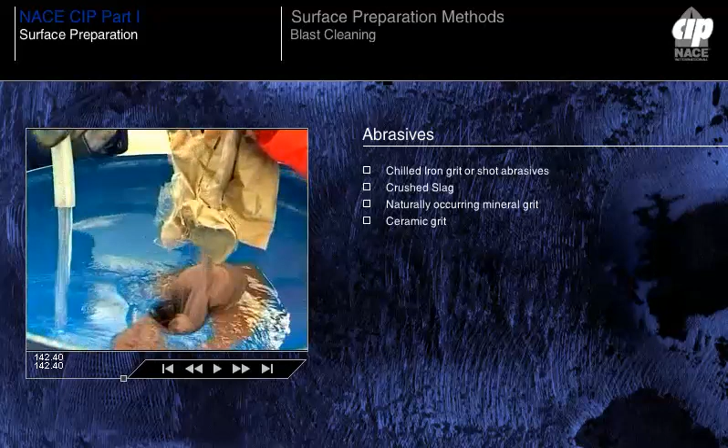This is by far the most widely used abrasive for surface preparation in a coatings application facility or any similar workshop environment. Chilled iron grit is available in a variety of grades and to a specific minimum hardness. It is an excellent general-purpose abrasive due to its relatively high density, which gives high particle energy, and its slow but effective rate of breakdown, which maintains cutting edges on the grit particles.

While chilled iron grit is used extensively for grit blast preparation in works or on-site where grit reclamation and recirculation can be achieved, it is too expensive an abrasive to be used where grit reclamation is not possible, as on many site jobs.

Crushed slags from metallurgical processes have been made available as relatively cheap expendable abrasives. Copper slag, coal slag and aluminium slag are common. While quite effective grits for once-only use, by reason of their rapid breakdown to dust, they are not generally suitable for grit reclamation and reuse. These materials are often called expendable abrasives.

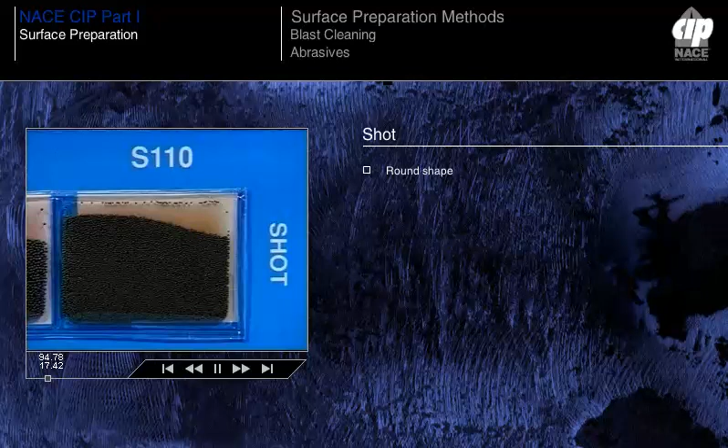Types of blasting abrasive that are rounded in shape are known as shot. Their common use during the development of blast cleaning techniques leads to the common misuse of the term shot blasting. Shot used for blast cleaning has less cutting effect and hence will prolong the life of blasting equipment and machinery, for example, wheel abrators and other automated equipment. The disadvantage is that less cutting effect gives a more rounded, less rough surface, often below the adhesion requirements of today's high-performance coatings.

It is still widely used in blast cleaning machines used to prepare steel prior to fabrication. The pre-fabrication primers used must be carefully selected, and must be compatible with the surface produced by shot blast cleaning and with the subsequent coatings if they are to remain on the steel surface and become part of the coating system. In addition to blast cleaning, shot blasting may usefully work harden a metal surface by peening, a process which can reduce the incidence of stress corrosion cracking.

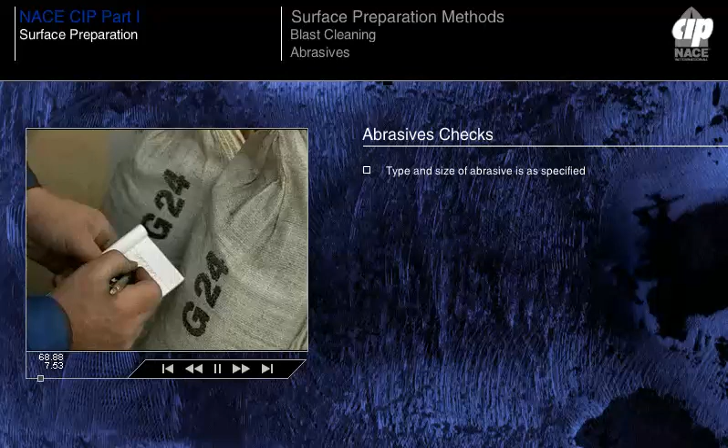The inspector and the operator should ensure that both the type and size of abrasive being used is as specified, and that the appropriate specified recycling procedure is followed. Most metallic abrasives, such as iron and steel shot and grit, and expensive abrasives, such as glass beads, may be recycled. Contaminants, including fines, dust, paint and mill scale, must be removed from the abrasive materials if they are to be recycled.

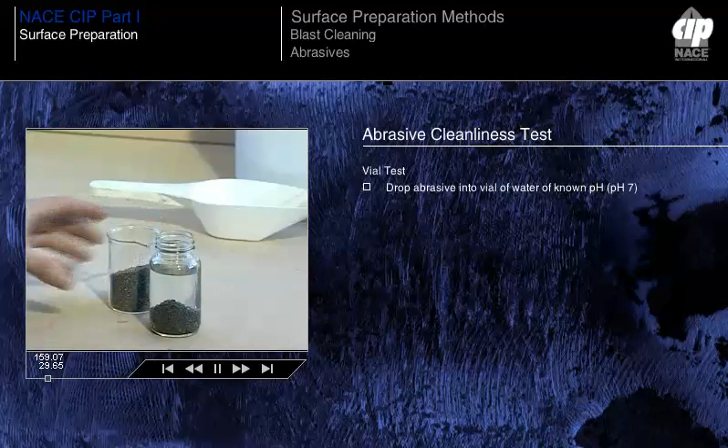Abrasives must be clean and free of moisture. They should be stored off the ground, away from moisture and the elements. Abrasives can be tested for cleanliness through use of a simple test known as the vial test. Some of the abrasive is dropped into a small vial of water of known pH, preferably distilled or deionized water, pH 7, and shaken. Typically, the ratio should be 1 volume of abrasive to 2 volumes of water.

The top of the water is inspected for a film of grease or oil. The water can be visually checked for turbidity, cloudiness due to sediment, which is usually a sign of excess dirt, dust or clay in the abrasive.

A litmus or pH paper test of the water in the vial will tell whether the abrasive is acid or alkaline. pH paper will indicate the actual value of acidity or alkalinity. If the abrasive is dirty or is acid or alkaline, the coating inspector should document these results and immediately report to the owner's representative.

Litmus and pH paper indicates the presence of those chemical salts dissolved in water which form an acidic or basic solution. Note, litmus and pH paper will not detect the presence of the chlorides. If the red litmus paper changes to a blue color, the solution is basic. If the blue litmus paper changes to red, the solution is acidic. If, however, litmus paper does not change, it indicates the solution is neutral.

ASTM C136 is the test method for sieve analysis of fine and coarse aggregates. Typically, a 1 kilogram representative sample of abrasive is put through a series of screens, such as 12/40 or 16/40, and the percentage retained on each screen size is recorded. This test enables the inspector to compare the particle size and distribution of the abrasive with the data furnished by the abrasive supplier.

Each type of abrasive is generally available in more than one size. Abrasives are graded according to how fine a mesh or sieve screen they can pass through without one particle of abrasive remaining on the mesh. When in doubt about whether a given abrasive is the correct size, a mesh or sieve test may be performed.

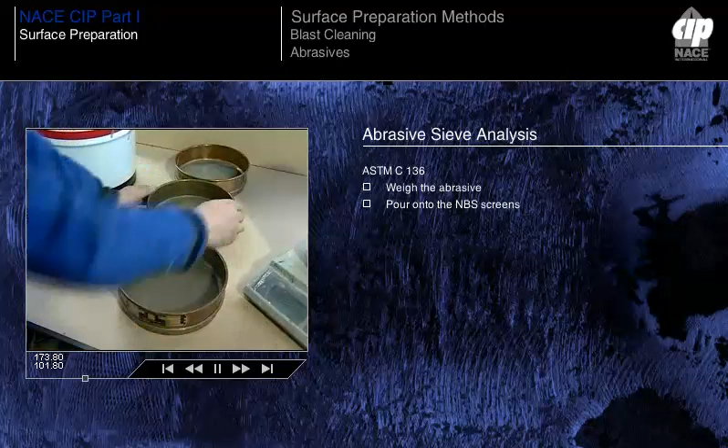Equipment required for the test includes an accurate balance and a set of NBS screens. A convenient quantity of abrasive is weighed, 1,000 grams is a very handy weight, and then poured into the top of the nested screens. The screens are nested so that the screen with the largest openings is on top, graded down through the screen with the smallest openings on the bottom. For example, from top to bottom, number 8, number 12, number 16, number 40, number 50, and so on.

The screens are shaken over a retaining pan. The abrasive particles are retained on the screens whose sizes are just smaller than the abrasive particle. The finest abrasive particles pass all the way through and are caught on the pan. The next step is to weigh the particles which remained on each screen and calculate the percentage retained. This is why using 1,000 grams of abrasive to start with is convenient. If, for example, 238 grams of abrasive is retained at a given level, we know that 23.8% of the abrasive was retained at that level without doing a lot of extensive arithmetic.

In addition to the specific size of abrasive, hardness is also a significant factor. Harder abrasives have more cutting effect, but may also shatter on impact, limiting their ability to be recycled. Softer abrasives have less cutting effect and may become rounded as they are used, but recycling is an economic advantage of such materials. Hardness is commonly measured on the Rockwell scale.

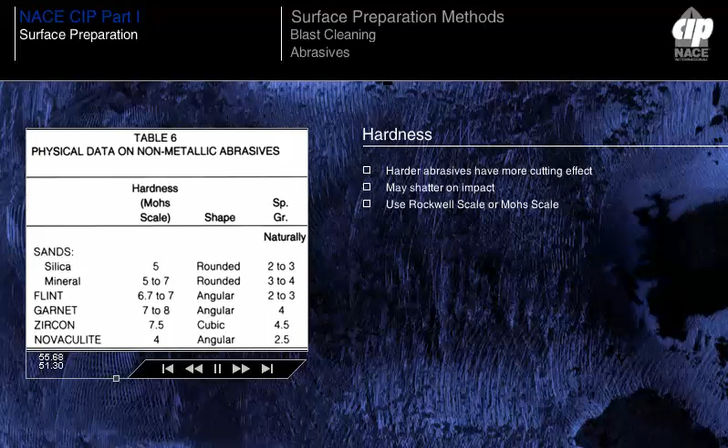For example, metallic chilled iron grit, HRC range 50 to 55, or on the Mohs scale, for example, copper slag abrasive, hardness range 6 to 7 Mohs. These two scales may be correlated, but manufacturers typically quote one or the other scale, not both. The following types of abrasive are generally available.

In addition to the other abrasives we've discussed, the agricultural abrasives are commonly used in a variety of situations where abrasive dust associated with other abrasives may be harmful to sensitive equipment. When stainless steel or other high-purity alloys are blasted, it is important that the abrasive cannot embed metallic particles in the surface. Crushed walnut shells have been used, for example, to blast clean components of the Space Shuttle to preserve the integrity of the special alloy materials.

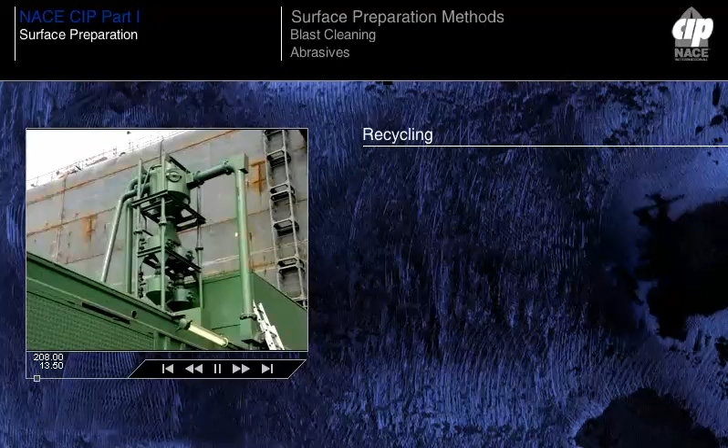Recycling is usually done so that expensive abrasives, such as high-grade metallics, can be reused. It may also be used to reclaim less expensive abrasives, like sand, if shipping costs are a factor. The quality of the recycled material is critical. In centrifugal blasting, reclamation or recycling is a standard operation. The process is more difficult in nozzle blast operations, which are not confined. In small cabinets and blast rooms, recycling is fairly simple. It is more complex in larger rooms.

There are four major methods of reclamation. Screen method: in this method, the abrasive runs over a series of screens. The top, large-size screen eliminates oversized materials. The remaining abrasive falls down to a smaller screen. Dust and fines pass through, leaving only usable abrasive in the screen. The method can be done by hand or mechanically.

Air screen wash. In this separating system, the oversized abrasives are removed by mechanical screens. The abrasive is distributed over a wide sloping plate, which causes it to fall over the edge. As it falls, the abrasive passes through an airstream at a predetermined velocity. The usable, heavy abrasive is carried a short distance and then falls into a chute. This method is considered less precise than the screen method.

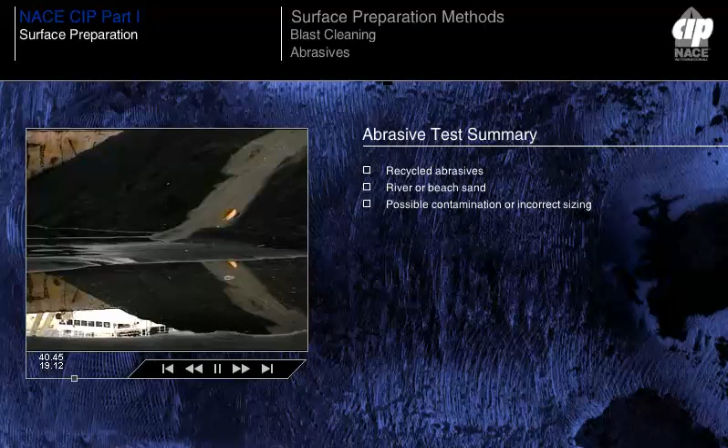Testing should be conducted if abrasives are being recycled, abrasives such as river or beach sand are being used, there is some reason to suspect incorrect sizing or contamination of the abrasives, there is much variation in profile depth, or there is an unexplained difference in color of the blasted steel.

For the safety and comfort of the blast cleaning operator, it is essential that good quality working clothes are used. Typically, these would include safety boots with steel insert toe cap, coveralls, strong leather gloves, and an air-fed blasting helmet incorporating a replaceable visor and leather cape. It is important that the operator has a good supply of clean, fresh air for breathing.

Two common ways of achieving this are: a supply of air at low pressure is delivered from the blast pot via a filter. This method has the disadvantage of the air being the same quality, often poor quality, as that used for blasting. Or a separate supply of air, also at relatively low pressure, is fed from a remote air-driven pump well away from any contaminated or dust-laden atmosphere.

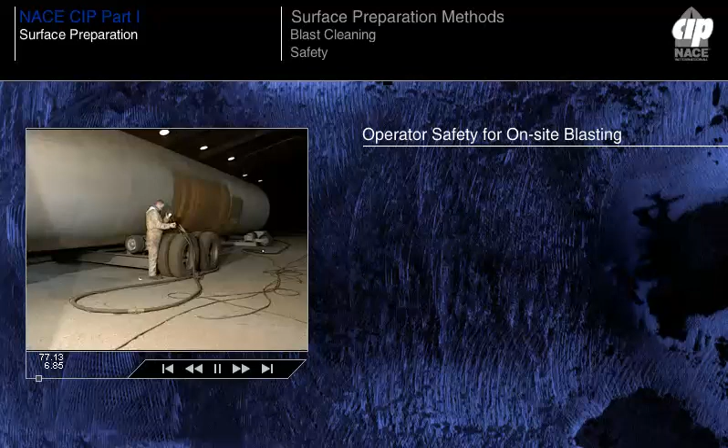Abrasive blast cleaning at high pressure is a dangerous operation. It is essential that steps are taken to protect both the operators and any spectators or other site personnel. Some considerations would be: no one but the operator should be allowed within the vicinity of the blast cleaning operation. Warning notices should be displayed. A lookout or potman should be on the alert. All equipment should be tested for safety in operation.

A dead man's handle cutout device should be fitted and used. A dead man remote control valve, which allows the machine to be controlled at the nozzle by the operator, should be part of this unit. The inspector should ensure that this safety feature is always operable and is in use during blast operations.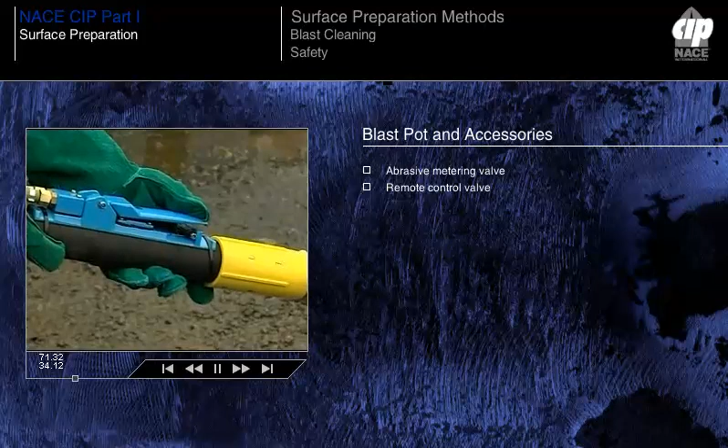Several accessories are commonly used with the blast pressure pot, including the abrasive metering valve, which meters the proper balance of abrasive to the air flow and nozzle size. Remote control or dead man valve. The remote control valve must be held in the closed position to pressurize and therefore activate the blast pot. When the valve is released, the blast machine is shut down, thus safeguarding the operator.

If the operator becomes ill, faints or trips and drops the hose, he or she is not in danger of being hit by flying abrasives or the blast hose whipping around in the work area. The dead man valve could be considered to be cost-effective because it can eliminate the need for a pot tender or blaster's helper.

Remote control valves may be operated by compressed air or electricity. Compressed air operated valves do not require any other power source than the compressor, but may be slow to react, particularly when the blast hoses and nozzle are a significant distance from the blast pot. Electrically operated valves operate instantaneously, but require a power source and are not intrinsically safe, so cannot be used in a hazardous environment.

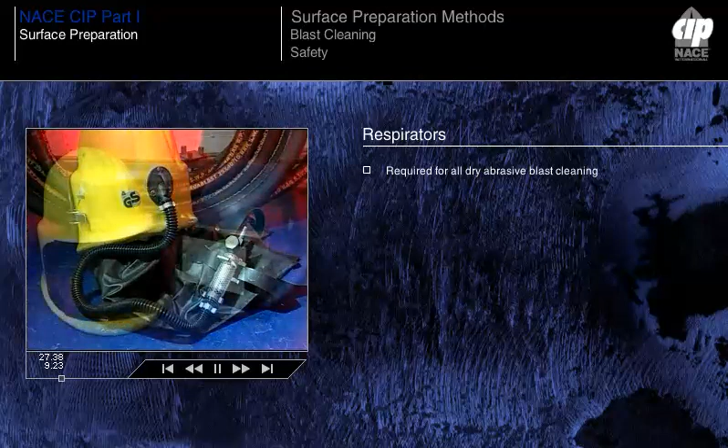Filtered and regulated air-supplied respirators are required for all dry abrasive blast cleaning. Not only the operator, but all personnel in the contaminated area must wear approved breathing apparatus. In addition, all equipment must be grounded to prevent electrical shock.

All participants in the surface preparation process, including coating inspectors, should use common sense in detecting potential hazards. Any lighting, scaffolding or equipment malfunctions presenting safety hazards should be reported to the appropriate person. Knowledgeable and responsible workers will always assure themselves of the safety of staging, spiders or swing scaffolding before using them for work or for inspection.

Never get into the path of an abrasive blast. The abrasive particles can be traveling as fast as 450 miles per hour, having the effect of a shotgun blast. The coating inspector must follow all safety and health rules as established by the safety engineer or the person responsible for safety on the contract.

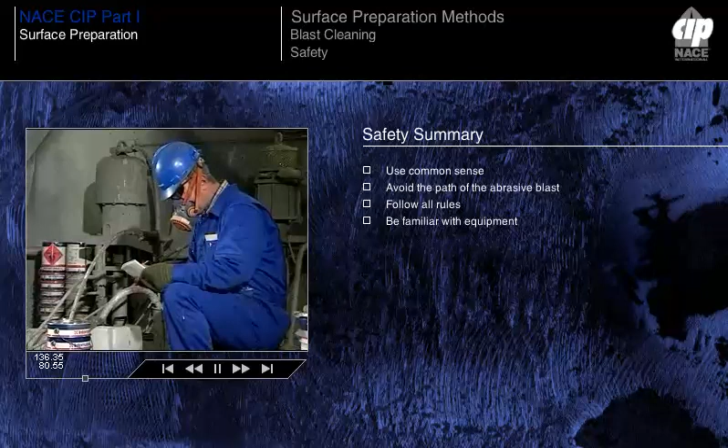The coating inspector should be familiar with, and when appropriate, make use of the following protective equipment: hoods, respirators, heavy protective clothing and gloves. The operators may be required to ground equipment, and the coating inspector may be required to verify that the equipment is properly grounded.

Site safety must conform to applicable worker protection rules and regulations. In the USA, OSHA, Occupational Safety and Health Administration regulations provide the necessary guidelines. In other countries, similar governmental bodies have developed similar regulations that must be observed. A more detailed appraisal of appropriate regulations is provided in the safety module of this program.

When blast cleaning is taking place, it is common that some areas should not be blasted for a variety of reasons. Typical examples include surfaces that are already painted or sensitive equipment such as valves or instruments. Where such surfaces have to be left unblasted, these can be masked off using suitable templates of metal or rubber, or suitably tough masking tapes firmly secured to the surface requiring protection from the blast stream.

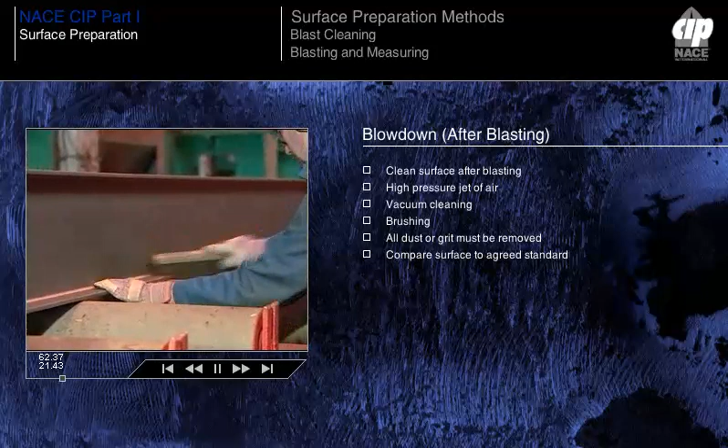On completion of blast cleaning, the blasted surface should be cleaned to remove residual dust and abrasive. It may be blown down with a high-pressure jet of clean dry air, vacuum cleaned or brushed with a clean dry brush until there are no traces of residual dust or grit. The surface at this point in time should closely resemble the visual standard of surface finish that was specified. For example, NACE No. 2, Sa 2.5, etc.

When dust or grit is not completely removed, it often remains hidden in crevices or corners. It can be disturbed by the high pressures of the paint spray stream and can be distributed into the paint film, causing a poorly adherent paint layer or an incomplete film.

In addition to achieving cleanliness, abrasive blasting alters the substrate from a more or less smooth surface to a uniformly textured surface. This textured surface is the result of the sharp abrasive particles striking the steel at high speed and leaving small impact craters or irregularities. This texture is called surface profile or anchor pattern. A well-written coating specification will call for a range of surface profile depth, expressed either in mils or microns. For example, the specification may call for a surface profile of 1.5 to 3.5 mils, 37 to 87 microns.

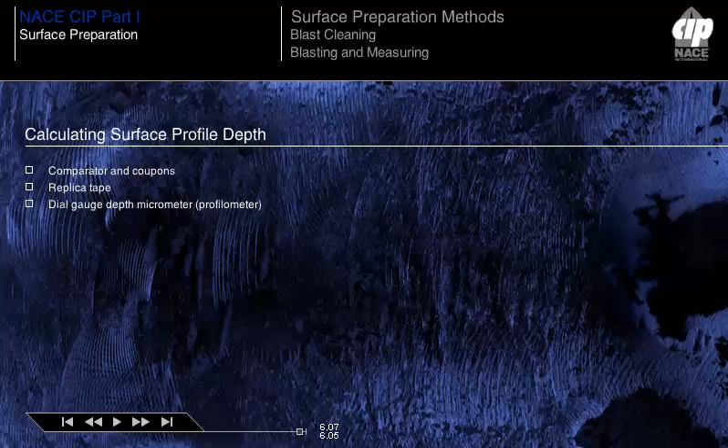The depth of surface profile can be evaluated by several methods shown here. Examples of surface profile coupons are available in 0.5 mil, 12 micron increments from half a mil to 3 mils, 12 to 75 microns. The coupons allow for determination of surface profile through comparison.

The Keane-Tator surface profile comparator consists of a reference disc and a 5-power illuminated magnifier. The disc has 5 separate leaves, each of which is assigned a number representative of the profile depth of the leaf. The reference disc is compared with the surface through the 5-power magnifier. The leaf that most closely approximates the roughness of the surface is considered to be the pattern of that surface. Reference discs are available for sand, grit, steel, or shot abrasives.

Surface profile may be measured with replica tape, a proprietary product produced by the Testex Corporation. Two types of tape are commonly used: coarse for 0.8 to 2 mil (20 to 50 microns) surface profile, and extra coarse for 1.5 to 4.5 mil (37 to 112 microns) surface profile.

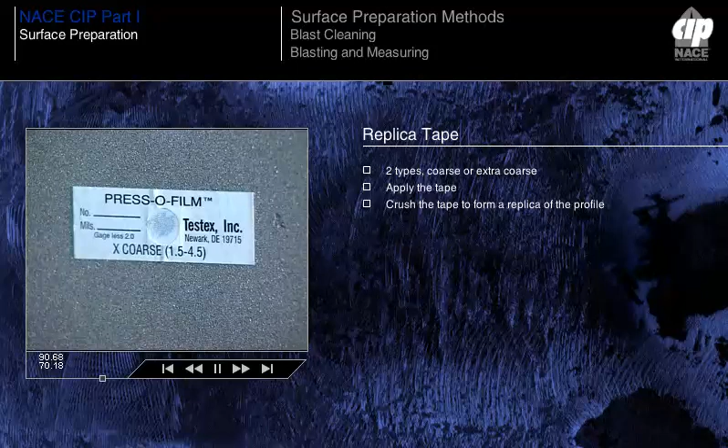The tape is removed from the surface and an anvil micrometer is used to measure the thickness of the foam and the plastic. The thickness of the mylar film, 2 mils (50 microns), is subtracted from the micrometer reading, and the result is the depth of the surface profile.

The base of the instrument rests on the tops of the peaks of the surface profile, while the spring-loaded top projects into the valleys. Method of use is according to ASTM D4417-91, Method B. This is a very sensitive test, and although it can be used in the field, its best application is in the laboratory.

Other surface profile instruments, such as a depth measuring microscope or diamond point tracing stylus gauges, are sophisticated laboratory methods not commonly used in the field, on-site or blast shop.

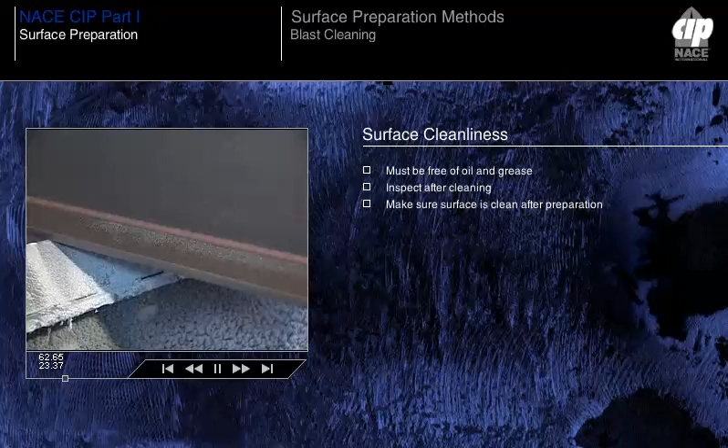Surfaces must be free of oil and grease before blast cleaning. Blast cleaning will not remove oil and grease. All surfaces should be inspected after cleaning for compliance with the specification. Cleanliness after preparation is important. Residual traces of abrasive must be blown off, vacuumed or swept away before primer coating.

Note, if lead is present in the paint waste or blast debris, the surface cannot be blown off. Contractor must follow all regulations regarding lead removal. Any scaffolding, staging or support steel above the surface must also be cleaned to avoid abrasive from dropping onto the freshly cleaned surface or onto the newly primed surface.

Surfaces prepared for coating should not be allowed to deteriorate or to be contaminated in any way between grit blasting and spraying. Clean, grit-blasted surfaces should not be handled or touched unless hands are protected with clean gloves. They should also not be exposed for prolonged periods or exposed at all to atmospheric or storage conditions of high humidity, as under such conditions oxidation and rusting may proceed very rapidly.

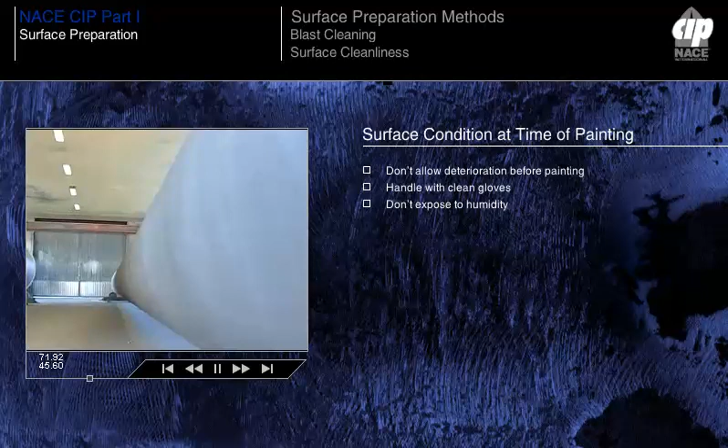As far as practicable, any storage after blast cleaning should be in a warm, dry environment, and ideally, spraying should follow blasting as quickly as possible. Commonly applied rules indicate a maximum delay of 4 hours and require that if visible deterioration has occurred, the surface preparation shall be repeated.

There are many standards related to surface preparation issued by many standards writing organizations. The ones that will be described in some detail in this module are produced by NACE International, formerly the National Association of Corrosion Engineers; SSPC, the Society for Protective Coatings, formerly the Steel Structures Painting Council; and ISO, the International Organization for Standardization. The relevant standards will be discussed as they relate to the specific surface preparation method at hand.

Ambient conditions may have an effect on the abrasive blasting process, as well as on the blast cleaned surface before painting. Ambient conditions include air temperature and substrate temperature, relative humidity, dew point temperature, and environmental exposure, for example, marine and industrial.

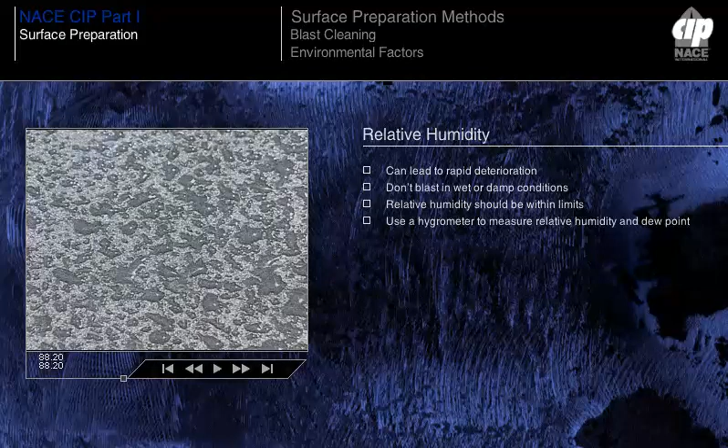Dew point is defined as the temperature at which condensation occurs. If the ambient temperature falls below dew point, or if some or all of the structure has a temperature below dew point, then condensation will occur. Coatings applied over a wet surface will generally not achieve adequate adhesion to the substrate. If abrasive blasting is performed when environmental conditions are close to the dew point temperature, condensation is likely, and flash rusting may occur.

The relative humidity and the dew point can be determined using a sling psychrometer and psychrometric charts, which are discussed in the inspection module of this program. To reduce the risk of a prepared surface deteriorating before coating, specifications often impose a time limit. Typical wording may be, coating shall be applied to surfaces prepared for painting within 4 hours of completion of the preparation activity.

Clearly, the risk of deterioration depends to a large extent on prevailing ambient conditions, temperature, relative humidity, etc. So the 4-hour period allowed may appear to be arbitrary. It is imposed as a helpful safeguard and should be observed when specified. Other typical time allowances may be 2 hours for the most critical applications or in changeable weather zones, or 6 hours or even 8 hours when stable, positive weather conditions can be anticipated.

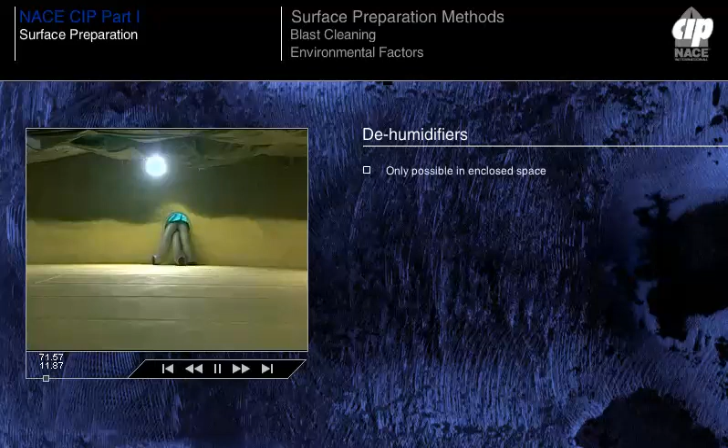One way to ensure that ambient conditions are suitable for painting is to dehumidify the air. This is naturally only possible in an enclosed space. A dehumidifier works by drawing ambient air across a desiccant, such as silica gel, and delivering the air at a lower RH to the desired space. A separate stream of air is heated and passed over the desiccant to remove the moisture and revitalize it. This second stream of air is vented to the atmosphere.

The attainment of very low humidity is possible in large spaces. This technique is commonly used in ships' tanks and crude oil storage tanks. Other types of dehumidification equipment are available, and these are discussed in the Advanced Surface Preparation module of this program.

In marine and industrial environments, where the air contains particles of chemical salts, the possibility exists that these salts may deposit on the workpiece. If this occurs after blast cleaning but before coating, it may be necessary to wash and re-blast the surface. The presence of certain chemical salt deposits, such as ferrous sulfate or ferrous hydroxides, may be determined by means of test papers or chemical test kits.

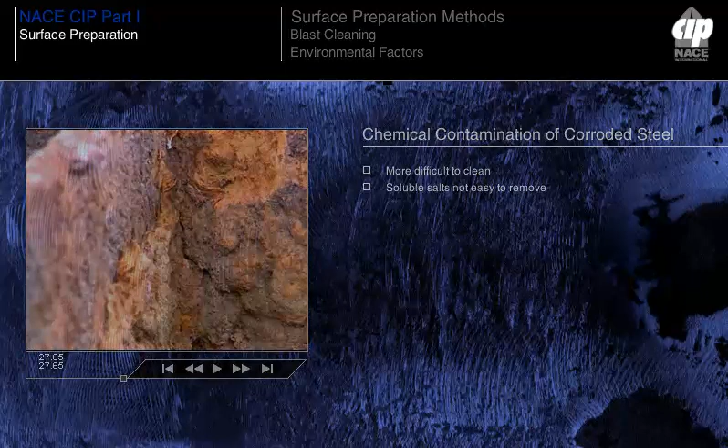Generally, corroded steel is more difficult to clean than new steel. The surface is less smooth than new steel, and it often contains chemical contaminants bonded to the steel in the corrosion process. These contaminants are known as soluble salts and are not easily removed in the surface preparation process. Steel that has been exposed to corrosion in the presence of certain contamination, for example sulfates and chlorides, may be difficult to adequately clean.

Even though the surface may appear to be properly blast cleaned and free of corrosion products, it may contain enough non-visible contamination to create a surface unsuitable for coating. In extreme cases, heavily contaminated areas will, after blasting, absorb moisture from the air, turn dark and rapidly deteriorate. This effect can sometimes be seen within minutes of completion of the blast cleaning process, particularly when humidity is relatively high. It is a clear indication that the surface is still contaminated.

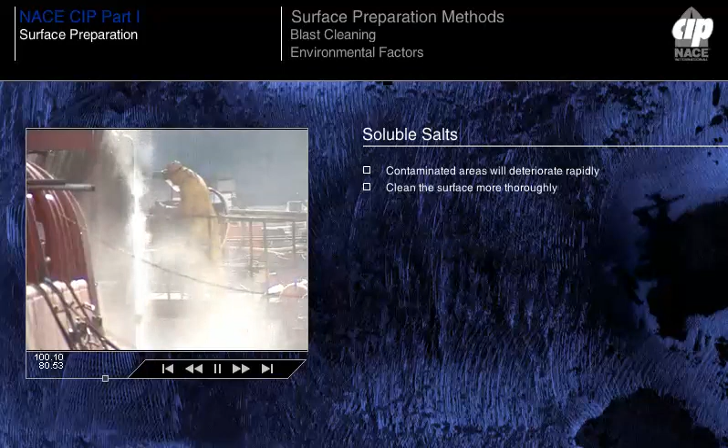To remedy the problem, the surface should be cleaned more thoroughly. Further blast cleaning may be effective in some cases, but better success may be achieved by washing using high-pressure wash equipment. Water jetting may also be effective to remove heavy contamination. Surface preparation in these cases should be followed by testing for soluble iron, ferrous salts, and/or chlorides, to ensure that remaining contamination is below critical levels.

The rust which forms on steel surfaces exposed to either industrial or marine atmospheres may contain significant quantities of sulfates and chlorides. If these compounds are not removed, they can give rise to premature paint failure. Spot tests have been developed to detect the presence of soluble iron, sulfates and chlorides on blast-cleaned steel. In these spot tests, color reactions are used to indicate the sites of contaminated rust.

Each method employs pieces of chemically treated filter paper which can be dried after use to provide permanent records. The papers are pressed against the steel surface which has been wetted with distilled water. After a short time in contact with the surface, the papers are removed and examined for color changes.